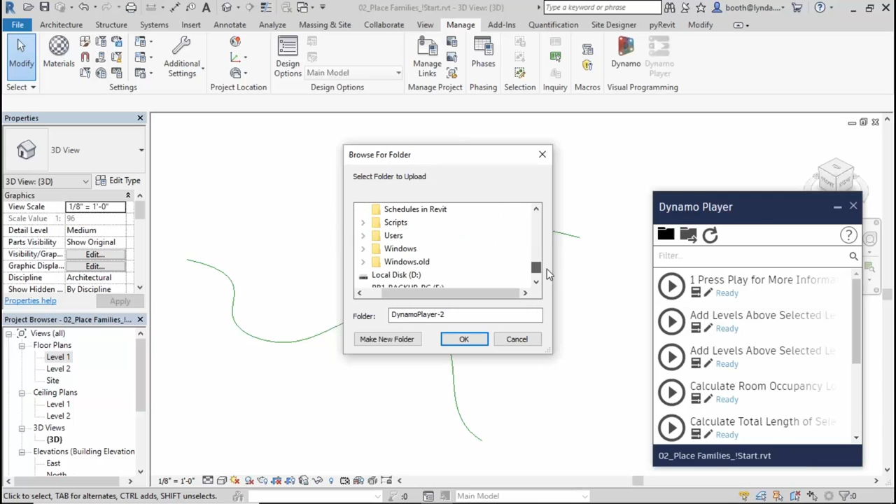Right next to that, there's another button here where you can actually browse to a different folder. So what I've done is prepared some files and put them on my D drive. So if I can just find my D drive here, and then this Dynamo folder, and that'll load a different collection of scripts. And then you can run one of these scripts by simply clicking the play button.

So what I'm going to do is these two lines that are here, I want to place families along those lines. Okay, so I'm going to try running this. I'm not sure if it remembers the selection, so it'll either work or it will generate an error saying it doesn't have a selection. We'll find out together here. So let's run it. And if it does generate the error, I'll just show you the next part of... there you go. It did remember the selection. Okay, so that's perfect. So you can see what it did. It created a bunch of trees along those paths.

Now, this one would have been fairly easy to do yourself directly in Revit because it's along a linear path, and we could have just simply done an array. This one is a little more challenging because it goes along a spline path, and there really isn't any way to do that in the standard Revit user interface other than to just manually place each one of those trees. Now, I'm using trees here, they could have been people, they could have been furniture. It doesn't really matter what you're putting along that path, but because I'm following an irregular path, it's a little bit more challenging to do that, so that's a place where Dynamo can help.

Now, what I was starting to say was if it didn't remember the selection, there are two little icons right here on Dynamo Player. There's this one and this one. This one allows you to edit the graph in Dynamo. We're going to build the graph actually from scratch, so we're not going to do that one. But this one says Edit Inputs, and what that does is it shows you any of the inputs that you can interact with in this particular graph, and the one that I was alluding to was this one here, the selection. So it remembered these two elements, which is this curved line here and this straight line here, and that's why the graph worked without an error.

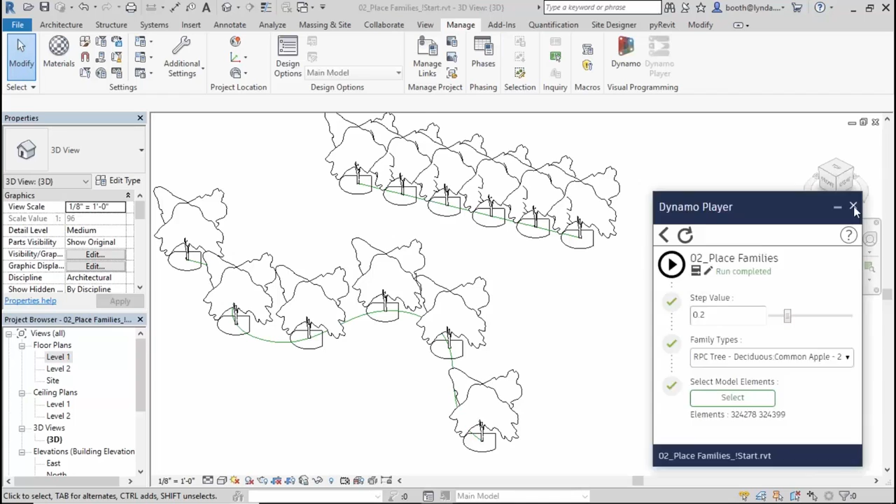But had it forgotten what those two selections were, then it would have generated some sort of warning, and we would have just simply gone here to these inputs, click select, and then select those two lines, and then run the graph again. It would have worked just fine. Okay, so that's what we're after. That's sort of the final result. Now you can't have both Dynamo Player and Dynamo open at the same time. So I'm going to close Dynamo Player, and all of your Dynamo actions will actually show on your undo stack. So what I'm going to do is just sort of undo the Dynamo script right here, and that's going to reset me back to where I started from.

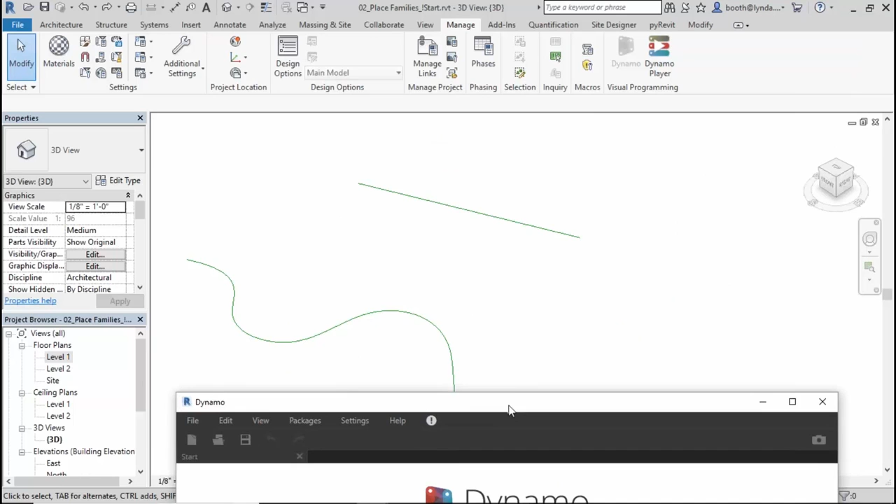And now I'm going to launch Dynamo with the button right next to Dynamo Player. Now Dynamo does run in a separate window, and I've got sort of tight screen real estate here in the webinar, so I'm going to have to kind of move my windows around to show you what's going on back in the background in Revit. But Dynamo tethers itself to the active Revit document. And so this is important when you're using Dynamo for Revit, because you have to start first by opening something in Revit, which we've done, right? I've got this starter file here with the two model lines in it. And then you have to then create or run a script on that file.

So I'm going to click New here, and I'm going to build this script from scratch, the one that we just saw. Okay. Now, the first thing I want to do is sort of a quote-unquote hello world example, but I'm going to do it with geometry as opposed to text. So if you've ever taken a computer programming class anywhere at community college or at a seminar or what have you, there's usually the hello world example where they try and show you how easy it is to program.

And so they write a little bit of code, and then they press a button, and then the words hello world appear on the screen, and everybody goes, ooh, ah. Well, the sort of equivalent of that, graphically speaking, in Dynamo would be to create some quick geometry, right? So what I want to do here is to show you how we can start to use Dynamo to create things, right? So I'm going to create a simple point, okay? I know, very exciting, but let's start with that.

So Dynamo is organized over here in a library, and if I expand these groupings in the library, they often have subgroupings and then sometimes even more subgroupings. And so at first, I recommend that you browse through the library and try and find where things are. And then eventually, you'll notice there's a search field up at the top. You'll be able to search for things because you'll kind of remember that you need this or that node.

So the way that Dynamo works fundamentally is there are nodes, which are little pre-written blocks of code, and then there are wires which connect the nodes together. So you drop a bunch of these nodes on your canvas, and then you just simply wire them together in the order you want the data to flow. And everything flows from left to right. So let's just go ahead and look at a really simple example of that.

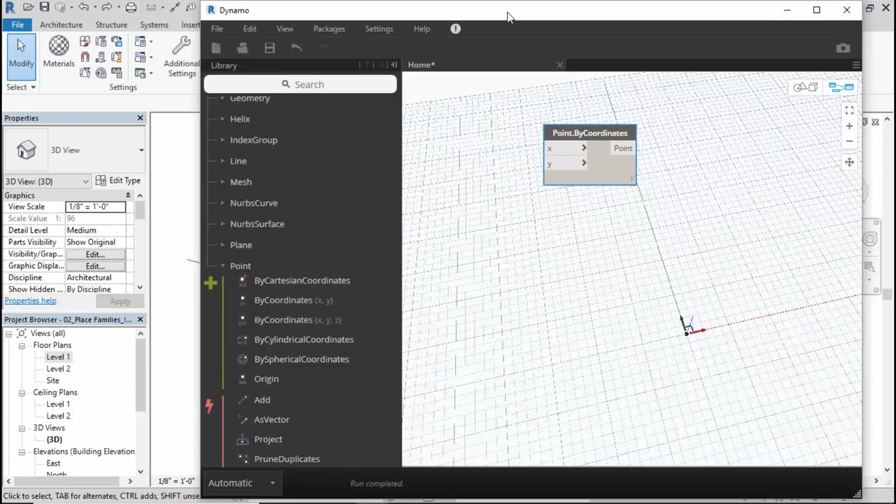Now, if I were to move this out of the way, there's this little blue dot here in Revit. Now, that's not really a real Revit thing. Like if I were to close Dynamo right now and refresh my Revit screen, that blue dot would go away. So there's actually a difference between geometry in Dynamo and geometry in Revit. And we're going to see that as we build this graph, that we're going to take Dynamo geometry and kind of convert it to Revit geometry and vice versa, okay?

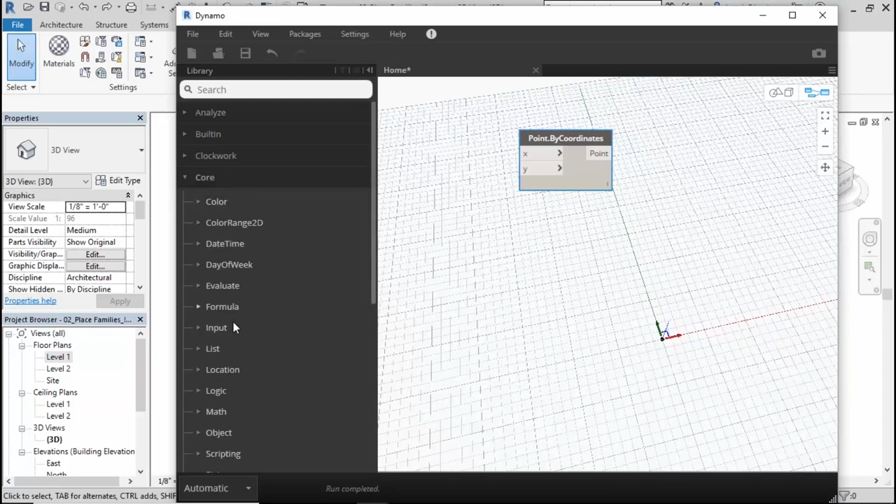So in this case, we've got a point here. Now, if I want to move this point somewhere else, I just need to feed in a different input in either X or Y or both. So I'm going to go up here to the core group, expand that, then expand input, and I'll click the number node twice. Now, I don't really need two of them necessarily, but I'm going to go ahead and put two of them so that I can have a different value for X and Y. But if you want the same value for both X and Y, then you only need one of these. So let's try, I don't know, 5 in the X and maybe 10 in the Y.

And you can just type in any number you want there. And then what you do is you click on the port on the right-hand side. That's an output, right? So here we have inputs, and these are outputs. And you just click there, and that starts creating this wire. And then you just connect that wire to the input of the next node.

And you can see in the canvas that the point has already moved over 5 units. And if I wire this one up to Y, you can see it moves up 10 units. If I reverse these, notice that you can only have one wire to an input at a time. So by connecting that one to the X, it disconnected the one that was already there. But I can kind of crisscross them that way, and it will go the other way.

Now, you can only have one input at a time, but you can have multiple outputs coming out of the same output. So notice that if I wanted 5 in both directions, I only need one number node. So those are a couple different ways that we could create a point and then sort of move it around. Okay, now this is all very basic stuff initially, but just a warm-up exercise to get us started. So that's what I'm calling the geometry equivalent of hello world, right? Create a point and kind of move it around. So very easy to do.

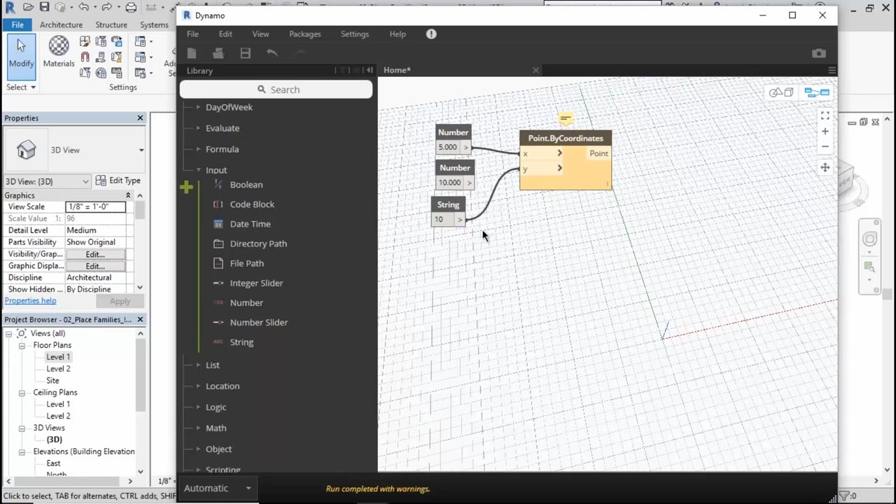Now, even if I took this string and put in a numerical value, it still wouldn't work because this string is formatted as text. You can see the same thing in Excel, right? There are certain functions in Excel that require numbers and others which require text, and so you have to match up the correct values. So again, it shields you from having to write all the code longhand, but you still have to understand the logic, you still have to understand the lingo, so the difference between a number and a string and things like that. We'll see more of that as we go along.

Okay, so what are we trying to do? Well, ultimately we were trying to place families along that path. Well, let's look for a node then that lets us place a family. So I'm going to go down to the bottom here, and there's a Revit branch, and that Revit branch gives me several things I can do in Revit. And what I want to do is create a Revit element.

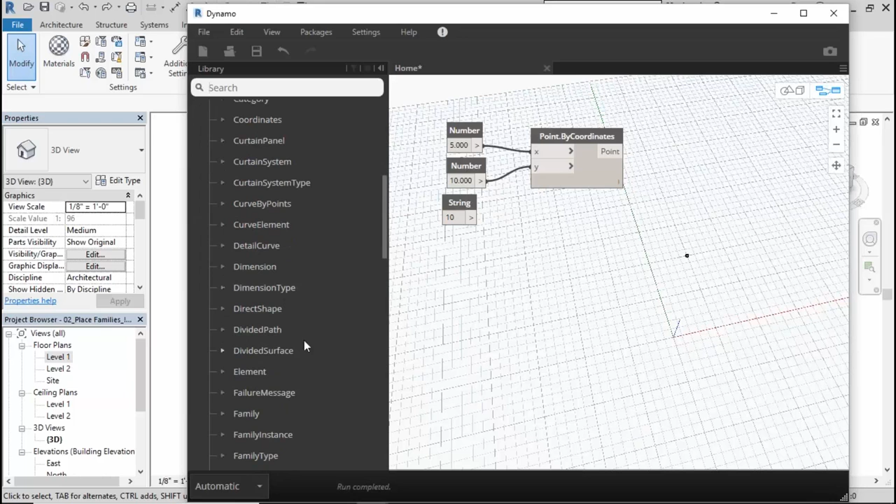So I'll go to this elements branch, and then under element again, this gets a little confusing sometimes, right? Oh, sorry, it's not element again, my fault. See, this is why some people just like to go right to search.

But of course, the trouble with searching is that you have to know what you're searching for, right? So when you're a beginner, you don't know what the names of all the nodes are, so what are you supposed to search for? So I'm going to go ahead and keep doing it through the library here initially, and then I'll switch to search a little bit later.

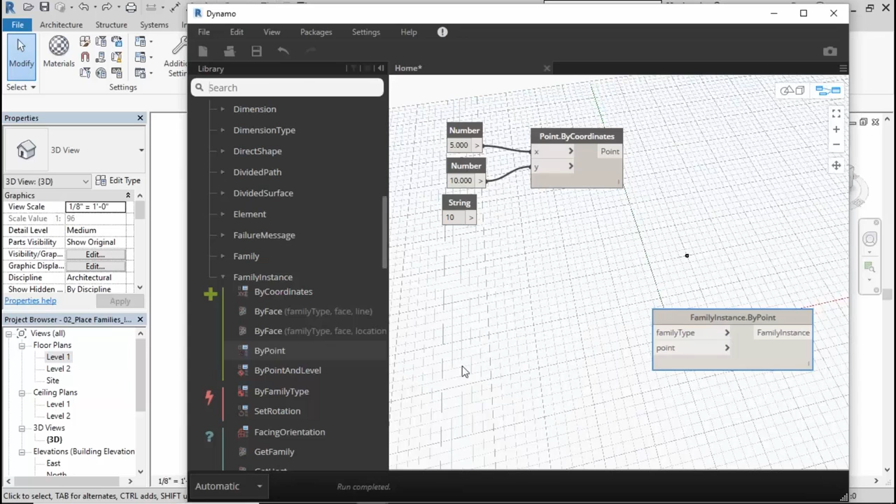So it was under family instance is what I was actually looking for, and then I'll do by point. Okay, so by point just simply means that I'm going to create an instance of a family at a location. Now this is a good way, especially if you're a beginner, to figure out how to set this up. Like, how do you know where to start? Well, think about what you want to end with. I want to end with a family placed in my model. So what inputs does that require?

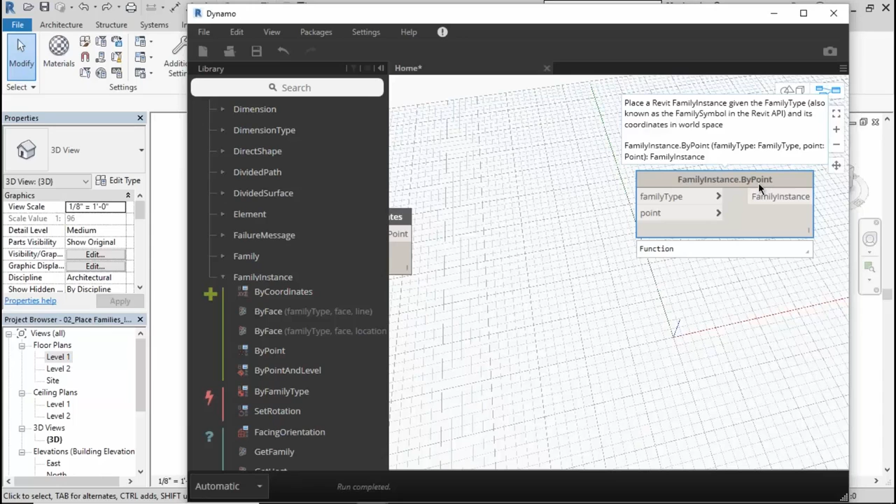So when we look at family instance by point, if you hover over it, it gives you a little message and it's giving you some more information. Not every node does this, but some of them do. So if you read through that, sometimes that's helpful. But there are two inputs. So one is family type. In other words, which family do you want to place? And the other one is point. Well, hey, we happen to have a point right here. So what if I just took that point and fed it in there?

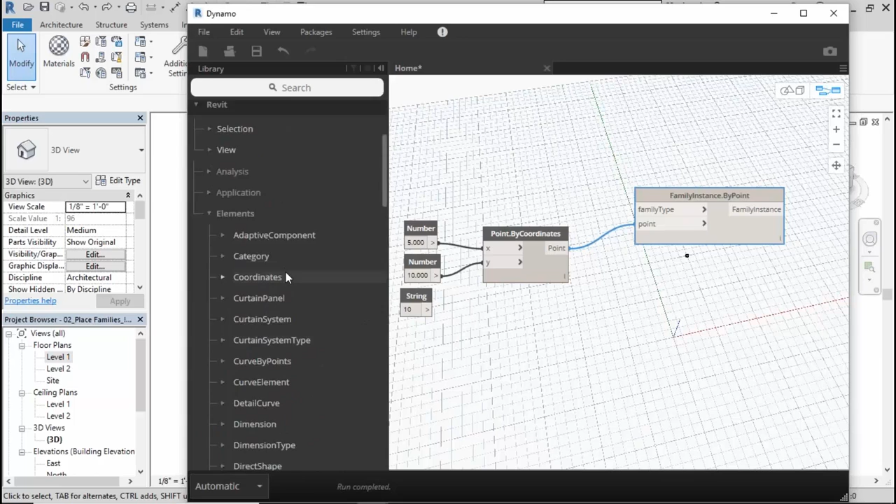Okay. Well, that's great. But now before I'm going to see anything, I still need to feed in that other input. So now I'm going to come up here under selection. So still under Revit, under selection, and then there's an item here called family types. Family types is a drop-down. And if you expand that drop-down list, it will list out all of the families that are in the current Revit document. So if you remember at the beginning I said you have to start with a Revit document open. So Dynamo is just reading that Revit document and giving you a list of all the families that are in there.

Now some of these you could place, it just gives you the full list, right? But some of these wouldn't make sense to try and place. Like you couldn't place a baluster because a baluster is part of a railing. So it would fail if you chose that. So you do have to know what's possible in Revit. Dynamo is not going to create new functionality that doesn't exist in Revit. It's just simply working with Revit.

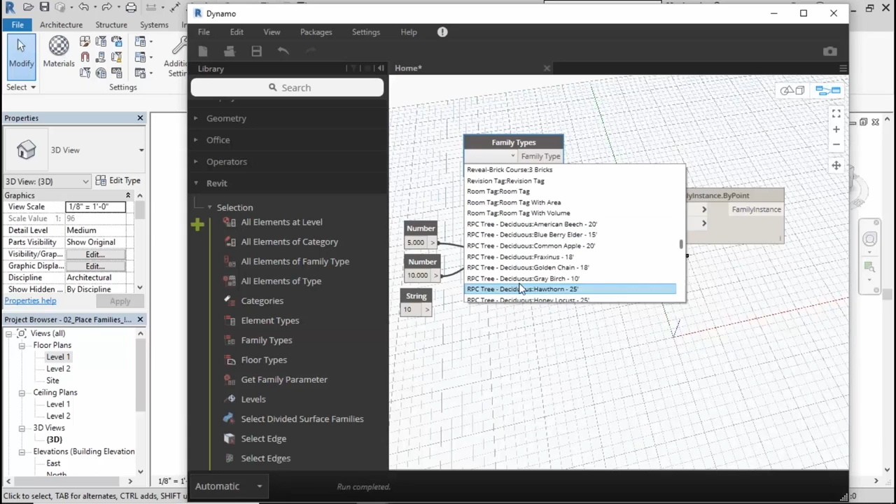So what I'm going to do is scroll down here to the R's and look for my RPC trees. And it doesn't really matter which one I choose here. So I'll choose this golden chain one, right? And then feed that in. And you won't see anything happen here in Dynamo just yet, but if we move this out of the way, notice that we do have a tree, and that tree is at 5, 10 or 10, 5. I forget which way I set it up, but it's at that point that we indicated.

Now, that's not exactly what we were looking for. We said we wanted to put trees along that path, right? But we're getting there. We're working our way up to it. And the point that I'm trying to make here is if you start at the end of your graph and think about what you want to create and then work your way backwards, it's almost like a reverse wizard walking you through the process. Just by looking at the inputs that are required, you can start to figure out what you've got to feed in there, okay?

Now, placing a single tree using Dynamo actually is more work than just doing it in Revit. So if you just needed to place a single tree, then just do it in Revit, okay? Dynamo wouldn't be very useful for you there unless you're going to do something with that tree further down in the graph. But we wanted to place multiple trees, and specifically we wanted to place them along that curved path. That was our goal, right? So let's back up here and think about it. Okay, we need to feed a family type. We've got that. And we need to feed a point.

Well, it turns out that a big part of working in Dynamo is lists. So you can feed one point into this port, or actually you could feed in a list of points. So what we're actually going to do is create a list of points, and specifically it's going to be a list of points that follow that curve that we have back there in Revit.

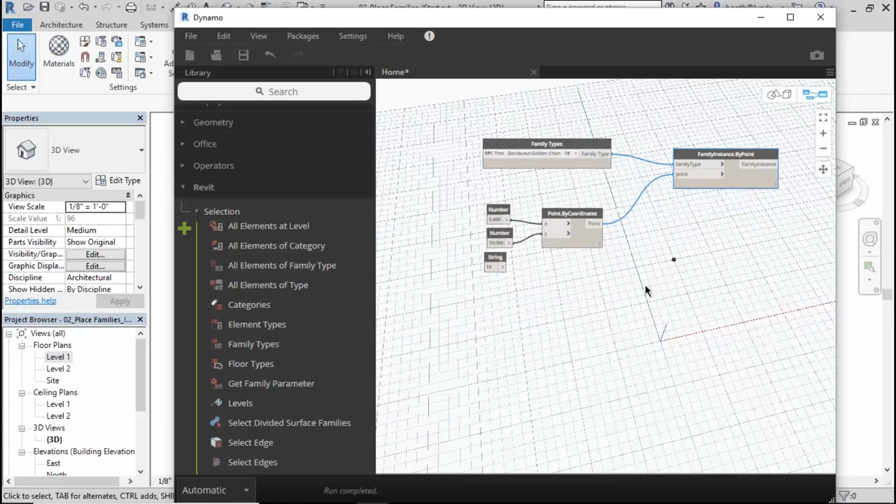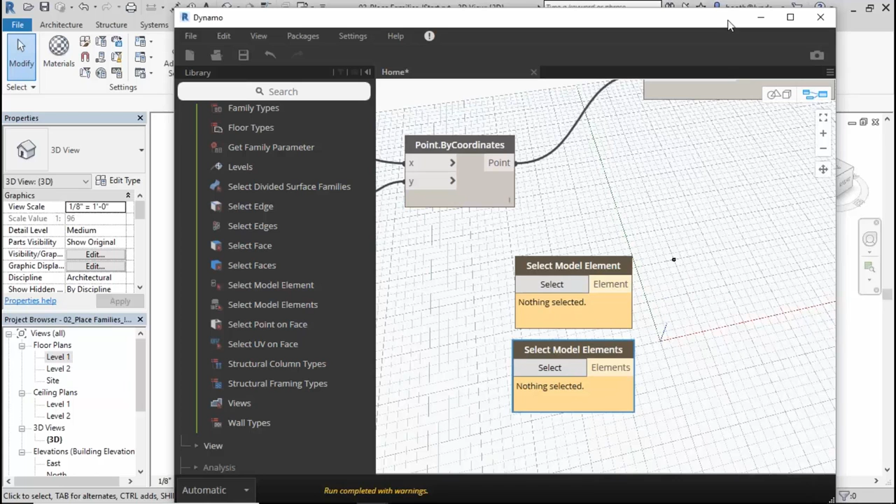Well, right here under Revit selection, there are some really general selection nodes called Select Model Element and Select Model Elements with an S. So you've got singular and plural. Now, if I look at both of these, they both have a button. They function a little differently. So I'm going to move this way over here and out of the way so that we can see Revit in the background, because the way this works is you click this select button, and it will put Revit in a selection mode.

Now, the Select Model Element node wants one thing. So I'm going to click on the spline, and then that node is happy. When it's yellow, it means it's not happy yet. You haven't satisfied the node. It doesn't necessarily mean there's anything wrong. It just means there's some condition that's not satisfied yet. And in this case, there wasn't a selection.

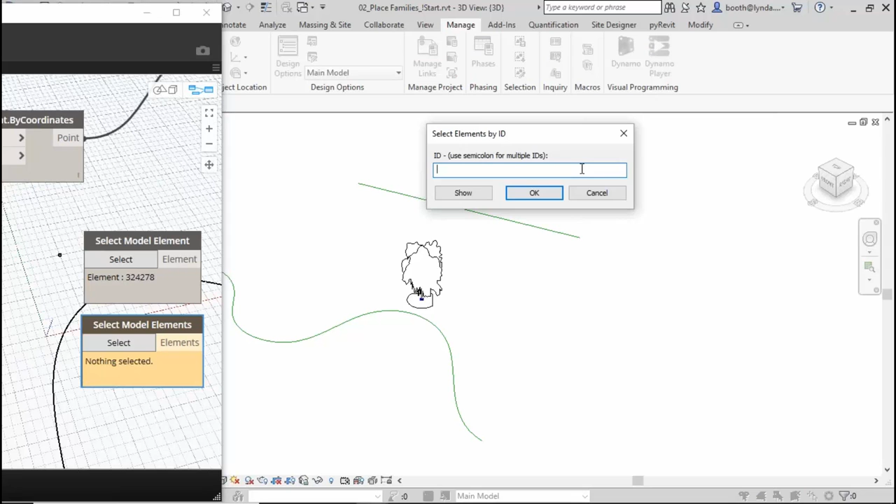The number here, 324278, that's the element ID of that Revit element. So if we go to Manage under Inquiry and we do Select by ID, if you type in that number, 324278, and you click OK, it will actually select that spline. So that number simply represents the unique Revit element ID of that thing. All right, so I'm going to deselect that.

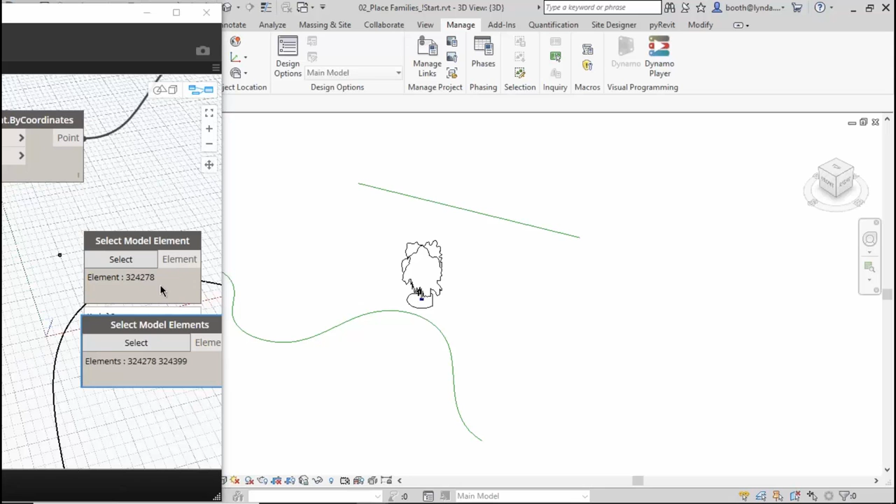Now I'm going to click the Select button on Select Model Elements. This one is a little bit trickier because the only way you can use this selection is either with a window or a crossing. So if you try and click, it won't work. What you do is click and drag, and I'm going to do a crossing selection here and grab both of those model lines. And you'll see I get two element IDs. That's really the only difference between those two selection nodes. If you want to select just one element, use this one. If you want to select multiple elements, use this one.

Now, these are both very limited selection nodes. A little bit later, I'm going to show you a different way to select that's a little more surgical, where you can actually reach into the model and select all the elements of a certain kind or certain family. That's more efficient than having to manually go in and pick them. But in some cases, manually picking them is all you need to do.

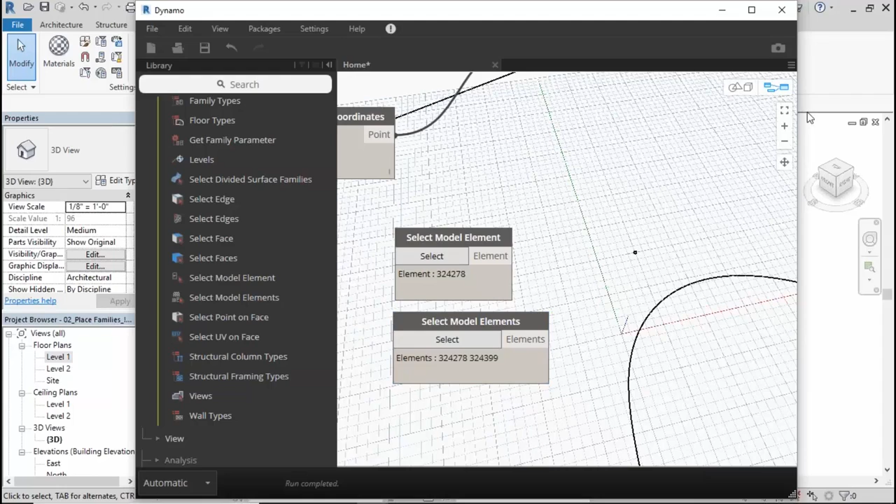Now, let me just adjust the 3D view here, and notice what happened. Even though we selected Revit geometry, Dynamo converted that Revit geometry into Dynamo geometry. So we've got these Dynamo paths now that represent those Revit elements. All right, so far so good.

We've got our two selection nodes. I'll move those over here. And the family instance by point, I'm going to push that over here. And I'm going to disconnect this point for right now, because we're not going to need that for the time being. We're going to create points a different way. So I need to put some stuff in the middle here.

The next thing I want to look at is, even though we selected these two elements, they still need to be turned into something the Dynamo graph can work with. So again, there's a difference between Revit geometry and Dynamo geometry. Sometimes you need what I'm going to call a bridge node. I don't think that's the official Dynamo term, but that's what I'm going to call it. We're going to bridge between what we currently have and what we're trying to create.

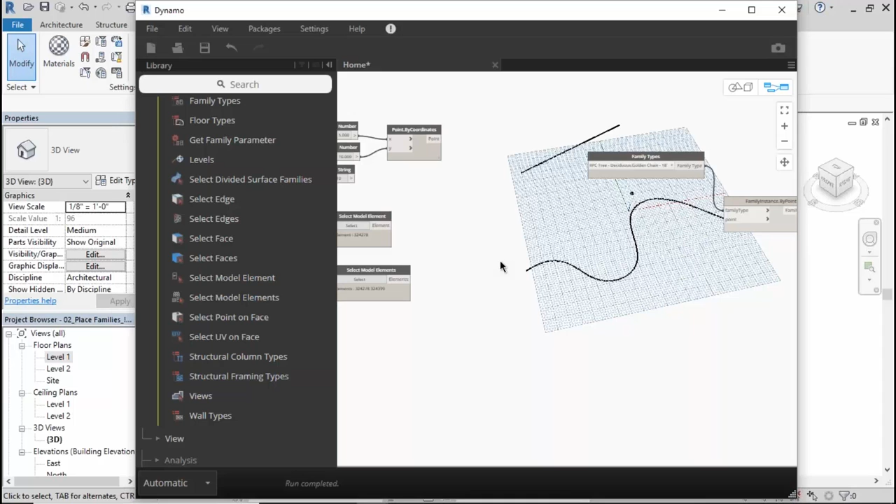So there's a node called Element.Curves. This is going to be the first one I'm going to search for. You could go looking for it in the library, but let me show you how the search works, because I promised you I would. So I'm going to type element dot, and at some point, if I just start typing, it'll start to find it, right?

And so the first item that comes up is the one that I want. Okay, and it says curves right here, so that's the name of this node, and what it does is it pulls the Dynamo curve out of the Revit selection. So right now these are the Revit elements, but we're going to convert those into Dynamo curves.

Now, curve in Dynamo is the mathematical sense of the word curve. So if you think back to high school math class, and I apologize if that's a painful memory for anyone, but a curve is just some linear element with a start point and an end point. And if you find the shortest distance between that start point and that end point, you have a special case of the curve called a line.

But a line is really just that. It's a special case of a linear curve. So we can have curves that are curvy, like this one here, or that are straight, like this one here. But as far as Dynamo is concerned, they're both curves. Okay, so that's one of the things you just have to know from kind of computer science logic in order for this to make sense.

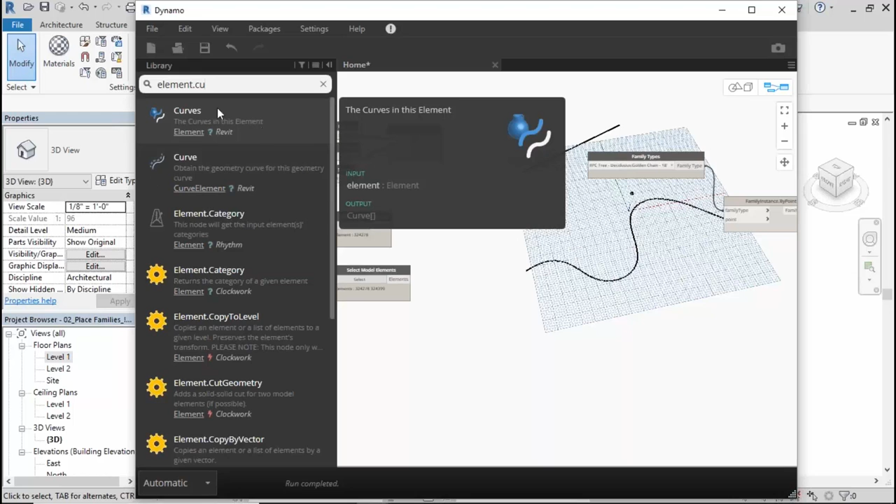Now, if you're trying to find where things are in the library, actually, there's a link right here, and if I click that, it will take me to the branch of the library. So there's Revit, Elements, Element, and then finally Curves. So if you start off searching, but you want to learn the library, that could be a good way to do it, because it'll take you right there. And I use a combination of both. Sometimes I browse for things, sometimes I search for them, just depending on what my needs are at any given time.

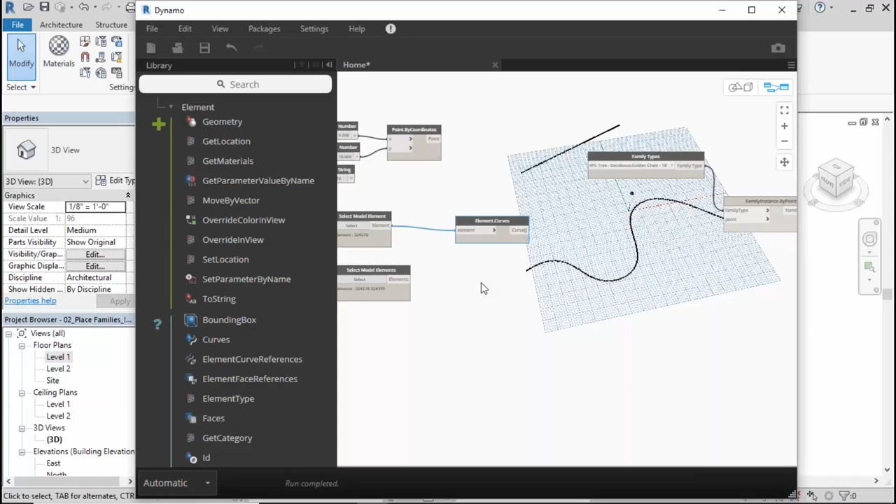So if I take this element here and I feed it into Element.Curves. So again, I'm going to take the single element here and feed it in. Now, just to make this clear, if I select this node, it'll highlight that. And then if I select this, it highlights it again. I don't know if you could tell there's a little bit of interference there. When I select this, there's really two things there. The thing underneath is the Revit element that we selected, and the thing on top of it is the converted curve that we asked Dynamo to create. So there's actually two different items there.

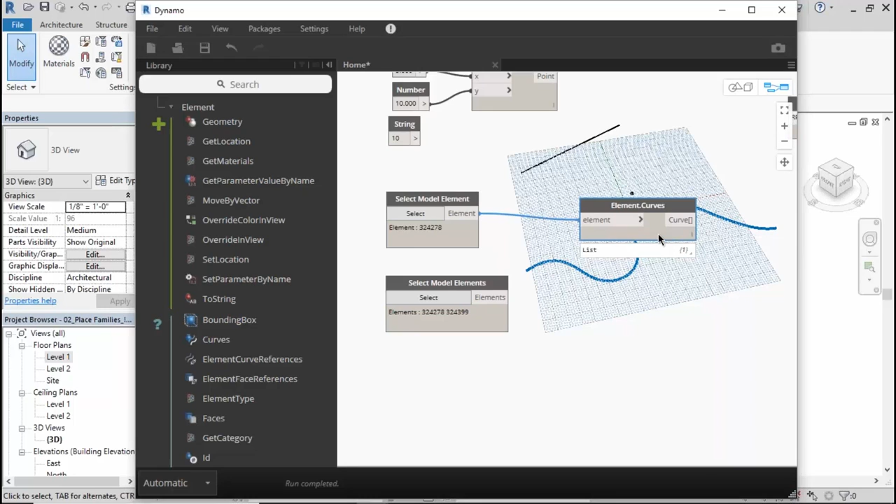It's this curve now that we're going to ask Dynamo to work on, and what we're going to ask Dynamo to do with it is to divide that curve up into a series of segments, or in other words, to find points along that curve at equal spacings. So there's a node for that called curve point at parameter.

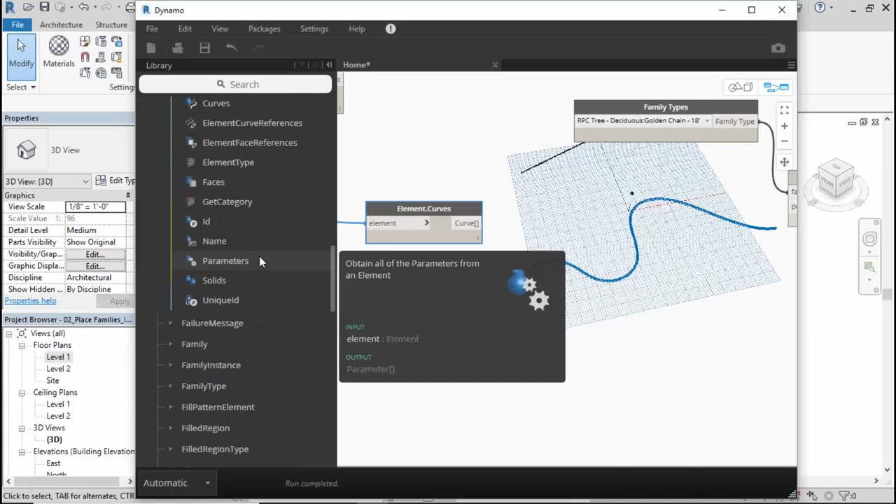Okay, so again, if we go through the library, we could get there from geometry. So where's geometry? Right here. And then we've got curve. And then under here, we've got point at parameter is what I'm looking for. Where is it here? Down here somewhere. Point at parameter right there. Or you could just type curve dot point at, and eventually it would show up in the search. So again, it's really up to you how you go about this.

So there are two inputs here. Curve, which, pretty good bet that those two will match, so I can feed that right in. If you tried to feed in the Revit element, it would fail. So you see how I get a warning here that says those two don't match. So it's really important to match data types. That's why we needed this intermediate node, or what I call the bridge node, to bridge between the Revit element and the Dynamo curve. So when we feed it together that way, everybody's happy, okay?

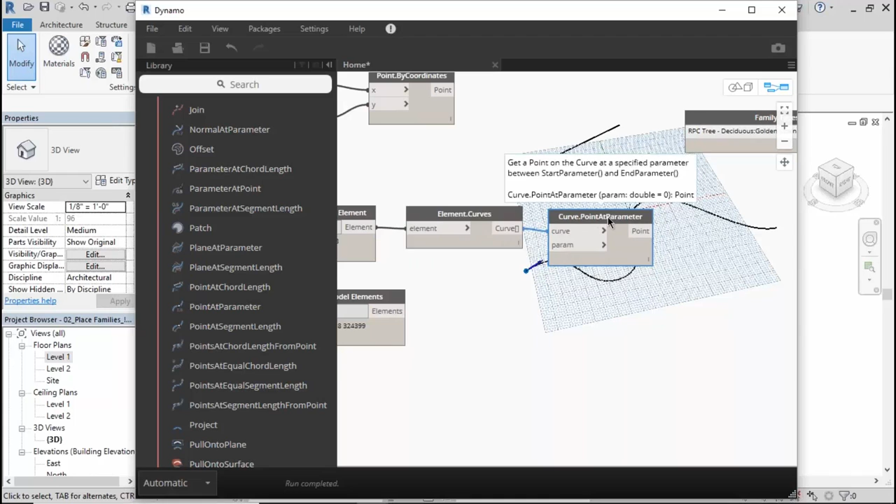So curve. Now, param, what does that mean? Well, parameter at which to evaluate. That's not really very helpful. Double. Okay, well, remember, that's a number, and the default value is 0. Well, what you need to know about anything that says parameter or param is that's a value between 0 and 1. So you can see where we are right now because the default value is 0. It's at this end of the curve here.

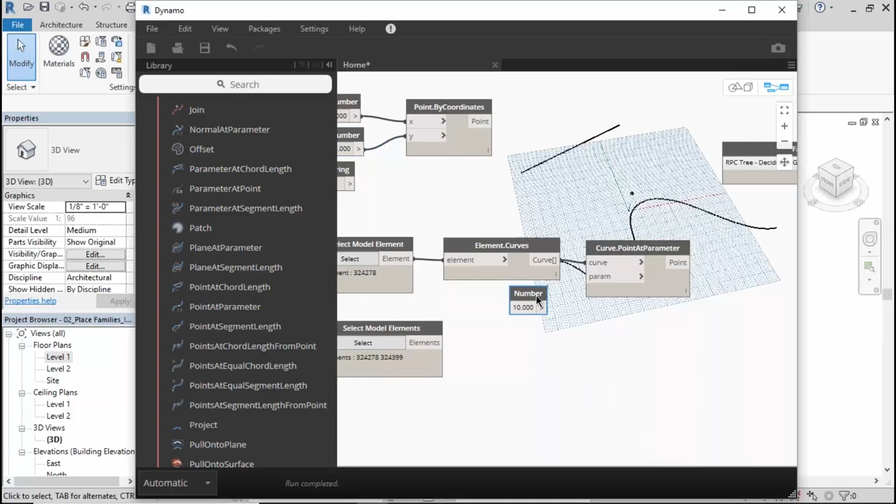I'm going to grab one of these number nodes over here, select it, do Control-C to copy, Control-V to paste, and paste it in right here. Now, I said a valid range is between 0 and 1. If I feed in 10, we're not going to see anything at all. See how there's no point over here? Well, it turns out it's there. It's just way, I can't even find it, but there it is. It's way out there because 10 puts it way off the curve at some tangent point. Not very useful, okay? So, sorry, let's zoom this back up again.

Okay, there we go. That's a little bit better. Okay, so we don't want 10, but let's put in 1. And now we're at this end. What if we put in 0.5? Okay, now we're at the middle, 0.25.

So now you're starting to see what the computer programmers call the domain of this parameter. And the domain just simply means the valid range. Okay, so a valid range for this input is between 0 and 1. So we want to make sure that any values that we feed into that param input fall within that domain. Otherwise, we're going to get something weird happening, like the point way off in hyperspace. Okay, so we want to keep it within that range.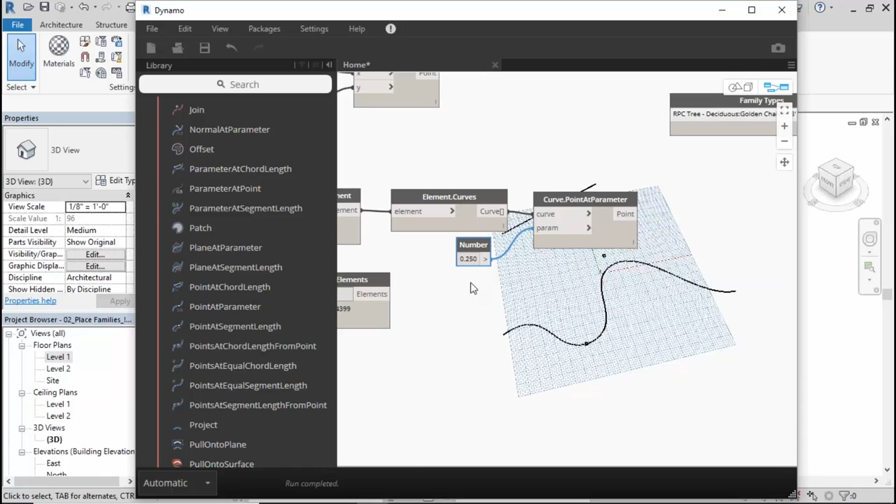All right, so at this point, what's coming out of here is a point. Now, the next thing I want to show you here, sort of a very basic thing, is that you can see output from every one of these nodes, okay? So if you hover over it, these little pop-ups appear and then they go away if you move away. Those are called preview bubbles.

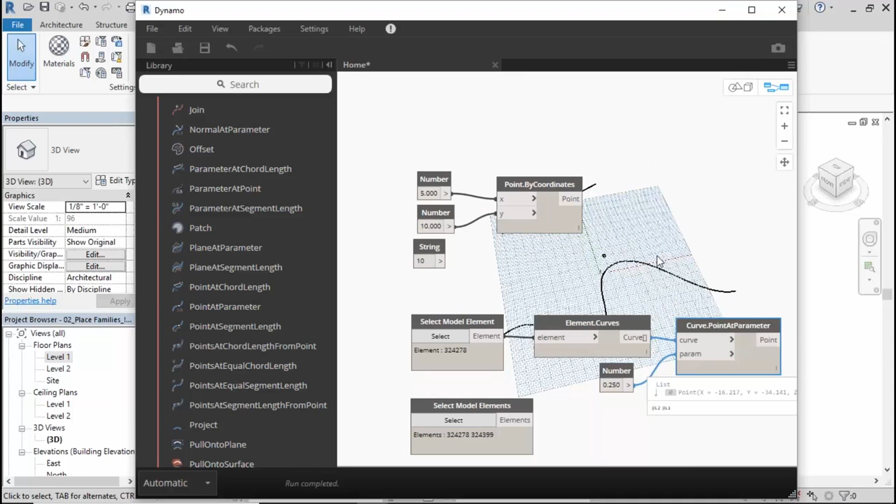Now, if you move your mouse down to the preview bubble, there's a push pin and you can click that push pin to keep that preview bubble open. And what you see here is that the output of this node is actually a point, which is exactly the same thing as what we created over here. See how output here is point, output here is point, which means that if I came back over here and I feed this one into here, we've already seen, that gives me a tree off the path.

But if I kind of move this so we can see both, and I feed this point in instead, now I get a tree on the path, okay? So we're making progress. We're getting there now. We've got a point. It's on the path. And, of course, if I change this to something else, there's 0.1, here's 0.5. You can see that that's moving the tree around, but keeping it on the path, all right?

So what I want to do is instead of just having one point at parameter, I want to create a bunch of points at parameter. So how do we do that? Well, that's our next major concept in Dynamo. I already alluded to it. I said Dynamo is all about lists. Okay, so lists of information are really important in Dynamo. So lists get generated for all sorts of things.

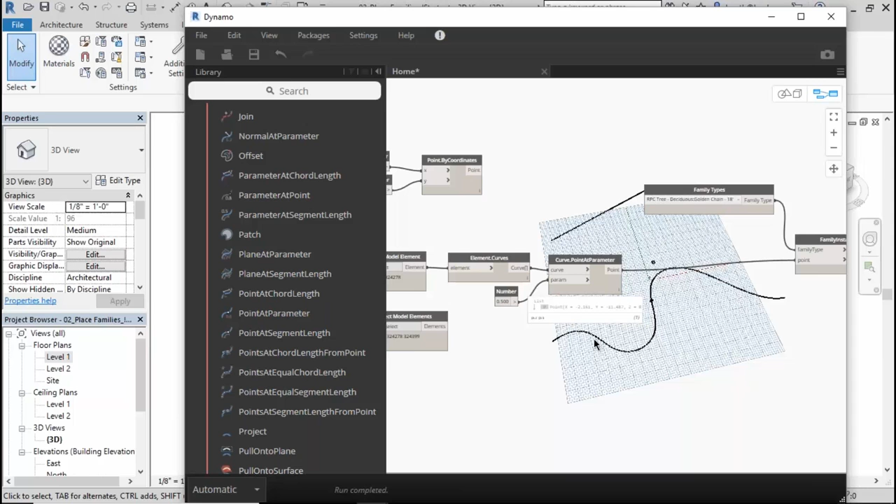So we're going to go up here to the core branch and then look at the list branch. And at the top, there are 3 really basic ways to create a list. You can just create a list with a number of items that you indicate, so you can do a 1 item list, 2 item, 3 item, or you can do a range or a sequence.

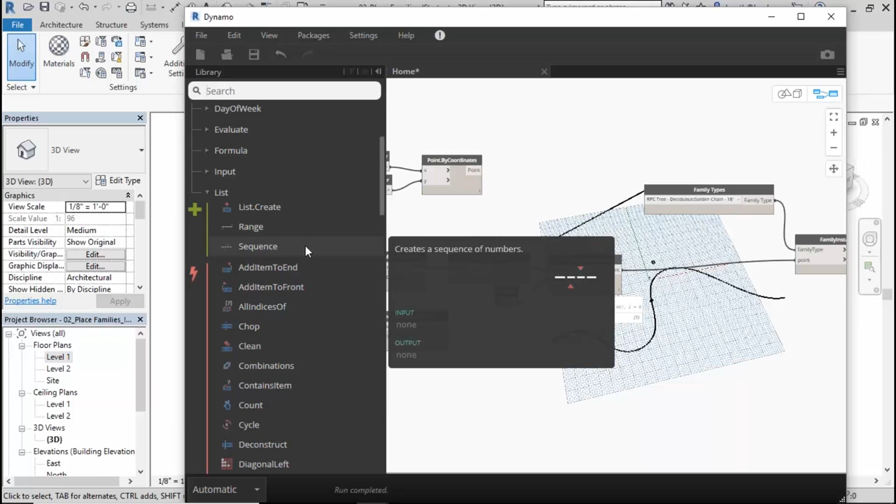So let's do range. Now, when you create a range node, let me just create that all by itself. Notice that if I hover over that, there's already 10 items on this list. You see how it says 10 there in the little curly brackets? So what I'm going to do is hover down here, click the push pin, and look at that list. So the range node has 3 inputs.

The start input is a number whose default value is 0. The end could be a number or a letter. Notice it says number or letter. The end one is defaulting to 9, and then the step is how much space we want between each number. That's defaulting to 1. Okay, so let me just quickly show you how this works.

Let me grab one of these number nodes here, copy and paste it again, and let's say that we just feed this into the start node. Well, notice the change that it had in the list there. Now we started at 0.5. We're still stepping by 1, so it goes 1.5, 2.5, 3.5 until it gets to 9 items, right? Because we're ending at the 9th item.

Now the other thing you're going to notice here is it actually goes 0 through 8. It doesn't go 1 through 9. So another computer science thing, another programmer thing, is that programmers start at 0. So you're just going to have to get used to that, okay? So the first item on a list is always item 0, which means that your count is always off by 1 if you're thinking in a 1-based list versus a 0-based list.

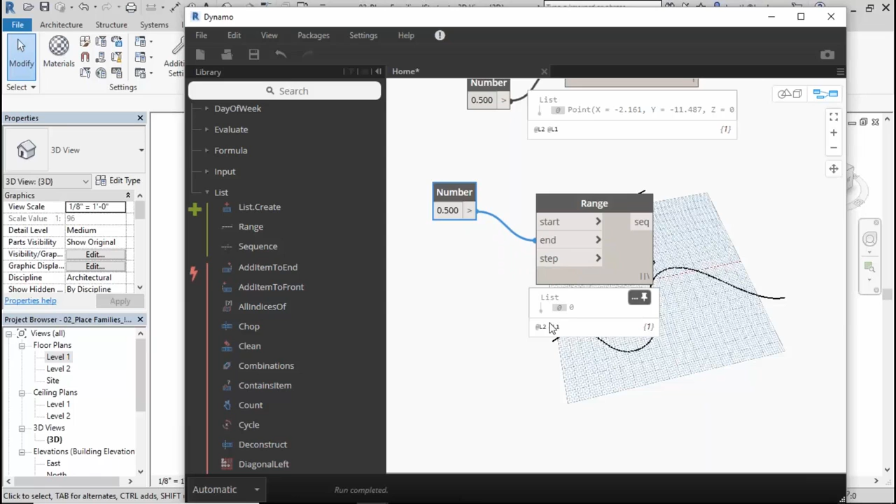Okay, what if I change this to right there? Okay, well now I asked to start at 0, to end at 0.5, but to step by 1, which means that I only get one item on the list, because if you put in item 0 and then you add 1 to it, you're already beyond the end of the range, right? So it can't give you anything there.

What if I change this to 5? Okay, well now I get a 5-item list. What if I put that in the step instead? Well, now I'm starting at 0, I'm ending at 9, the default, but I'm stepping by 5, so I'm only getting 2, right? Or now I'm getting 2, 4, 8, you know, up to 8. So if you vary each of the inputs, you're going to get a very different list each time, okay? So the point is, you just have to decide what you want to input into each of those 3 inputs in order to generate the list that you're after.

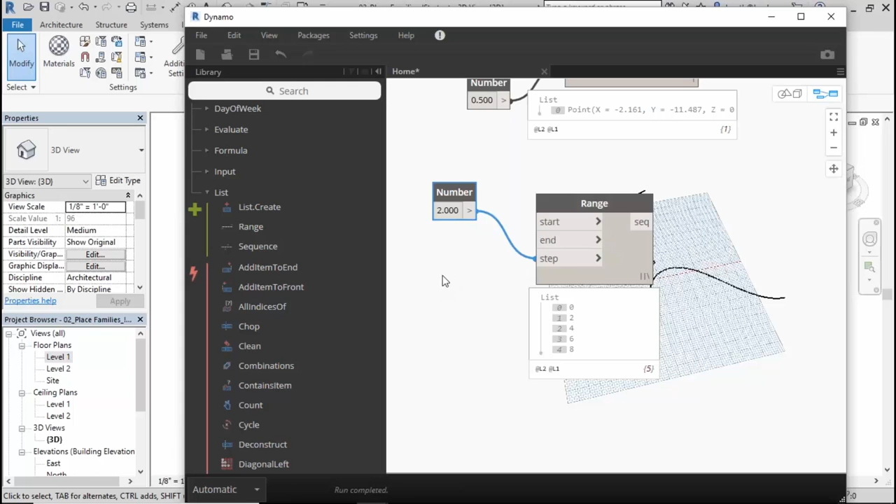Okay, so I'm going to introduce you to another node to make this a little bit more interactive, and that is a number slider. Now, we're going to feed this list ultimately into the param value, replacing this static number node here, okay? So let me just move this out of the way a little bit, and we're going to make room for the list in here.

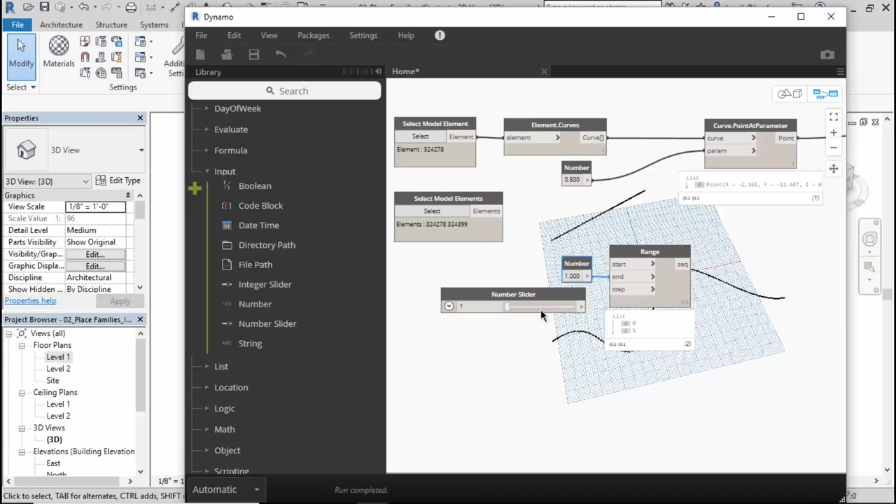So remember what we said the range was. We need to start at 0. We need to end at 1. Well, our default value for start is already 0, so nothing to do there. Our end value is currently defaulting to 9, so we're going to feed in a number node there and change that to 1. That's the end value we want. So now we know that our first value will be 0, our last value can't be more than 1. So now the step we're going to control with this slider.

Now, if we just feed this in, it's really not going to work too well, because notice that the domain of this slider is very large numbers, which well exceed 1. So we want to change the domain of this slider so that it goes in fractions between 0 and 1. And you do that with this little triangle right here. And you could say the minimum value is 0, the maximum value is 1, and the step is 0.1, for example. Well, now, as you change this slider, here's a 0.1 value, here's 0.2, here's 0.3, 0.4, and eventually you're going to have a very short list because it doesn't work anymore.

So it's going to work best at these smaller values, which means you might want to change this to 0.5, or you might even want to change this to 0.05 so that you get a little bit more range in here. However you do it, I'm going to stop at 0.2 because that gives me a decent quantity. It gives me 6 items and they're spaced 0.2 apart, okay? But as long as you build your slider in such a way that it works within the domain you're after, then you should get nice results.

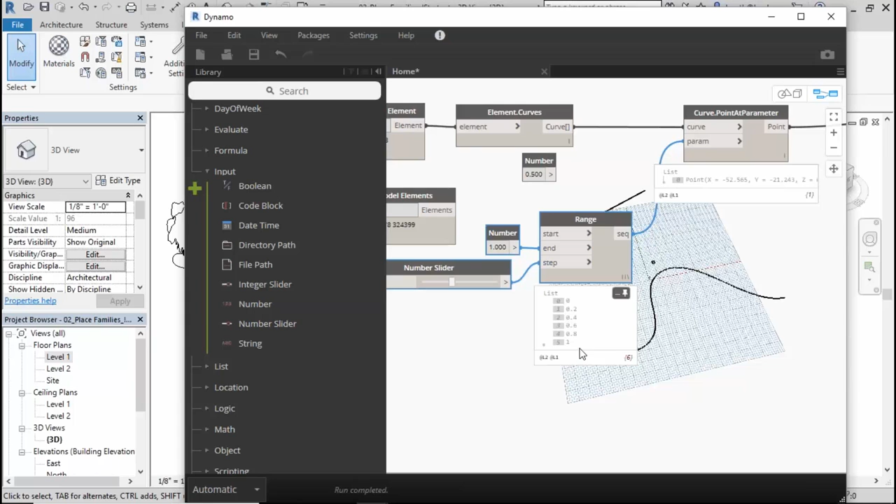So now I've got all of this. Let me just move that right about here, and then take that sequence and feed that into the parameter value, okay? So what does that do for me? Well, at the moment, it doesn't look like it did very much. Notice that I'm still getting only 1 point. So I've got 6 parameters, but for some reason, it's only generating 1 point, and then back here in Revit, it's only generating 1 tree. So what's going on here?

Well, there's another really important concept that we have to understand when working with lists in Dynamo. Lists have a certain way of matching up with one another. So I'm going to show you a couple different variations of this, but we call these ways of matching lists with one another lacing. So there's 3 values. There's shortest, there's longest, and there's something called cross product.

So shortest lacing takes 2 lists, and it just comes up with the smallest number of pairings possible. So if you have a list of 2 items on the one hand and a list of 4 items on the other hand, you're going to get 2 pairings because it's going to take the shorter list and just match up item 1 on that list with item 1 on the next list and item 2 with item 2, and then when it runs out, it just runs out. If you do longest lacing, it'll actually use the longest list and match everything up.

So it'll do 1 to 1, 2 to 2, but then when it runs out, it'll just match the last item on the short list with each of the remaining items on the long list. Okay, so you're actually going to get the last item on the short list used over and over again in order to satisfy the longest lacing. And then with cross product, if you had 2 and 4, you'd end up with 8 total pairings because it's going to match everything to everything else.

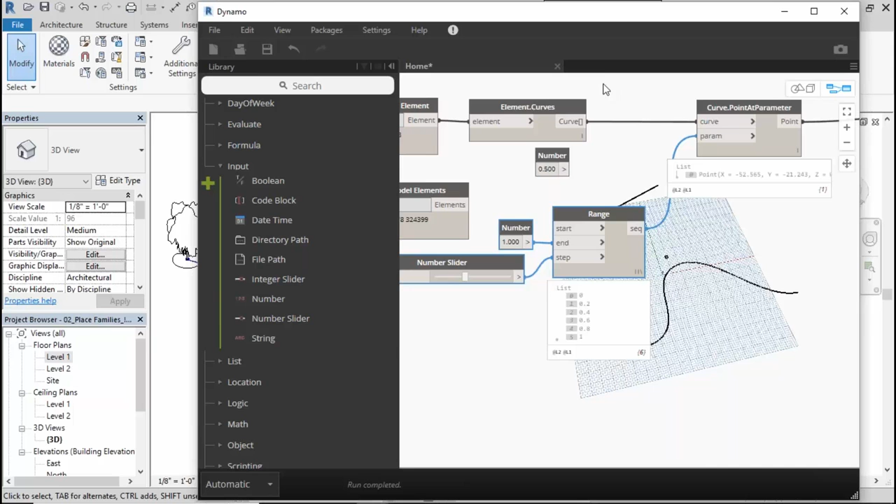Okay, so what we have to do is decide which lacing is going to work here in this scenario to give us what we're looking for. Okay, now in order to really help you understand that, I'm going to switch to the selection that includes both lines, because if I just show you with the curved line, it'll look like longest and cross product lacing are doing the same thing, and it might not be completely clear. But I think if we do it with at least 2 objects, it'll be a little bit easier to understand.

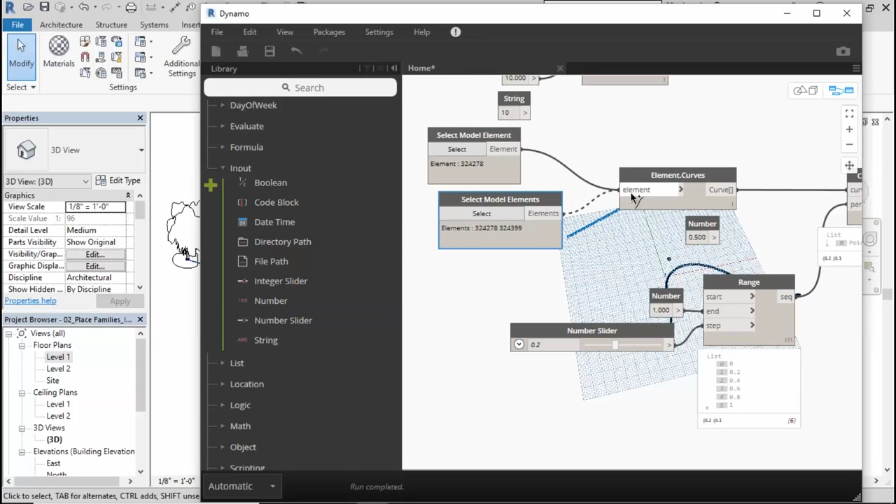So I'm going to take this model element 1 and move it out of the way and replace it with the select model elements 1. Notice that already had an impact on my list here, and that already had an impact back here in Revit. Now, what happened may not be what you expected. What we actually got there was item 0 matched to item 0, and you got the first tree on the first point on the curve.

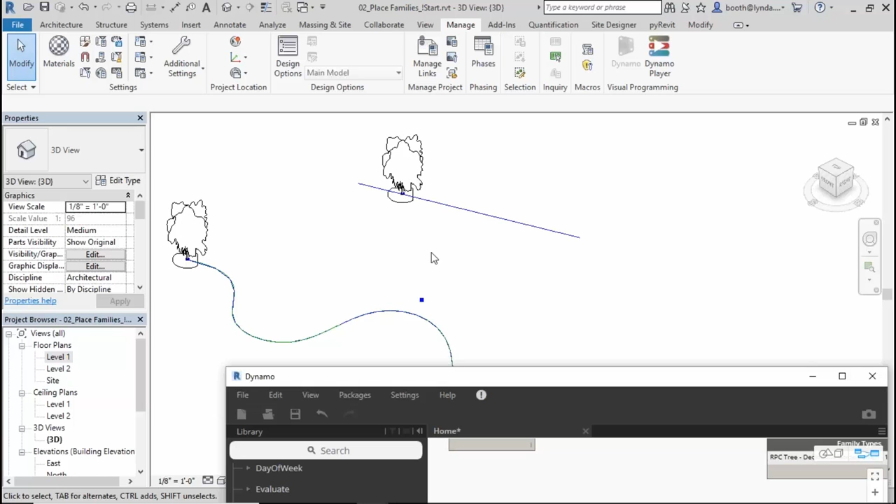And then it went to item 1 and item 1, and it shifted point 2, and it gave us this, and then it stopped. Because shortest lacing says, I've got a 2-item list, right? 2 curves, 1, 2, and then I've got a 6-item list, 6 parameters, and it just says match the first 2 items with the first 2 items and ignore the rest, okay? So what would happen if we took this thing, right-clicked it, and changed the lacing to longest? See how it's shortest by default? I'm going to change it to longest.

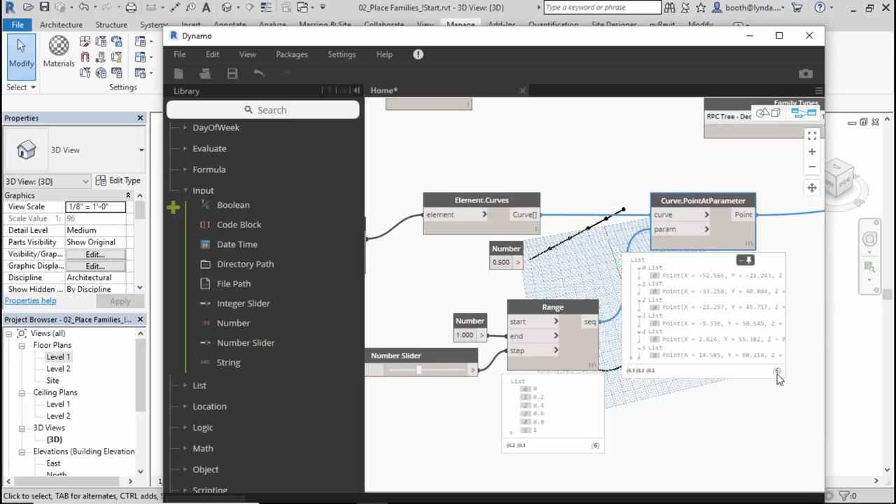Well, now I get a total of 6 points, because what I described longest lacing was, is it item 0 to item 0, item 1 to item 1, then it ran out. So now it's going to take item 1 on the shorter list and match it to items 2, 3, 4, 5, and 6 on the longer list. And what we get is closer, but still not quite what we were expecting, right? We don't have a tree in the first node here, and all the repeated trees are along the straight line. They're not on the curve, right? So what I was looking for was along the curve.

Well, now if I switch to cross product lacing, right-click, lacing, cross product, it will match every item on both lists with every other item on all the other lists, and you get something like this. Okay. Now, I started to say that if we had kept the original selection back here, a 1-item list instead of a 2-item list, then cross product would have worked, or longest lacing would have worked.

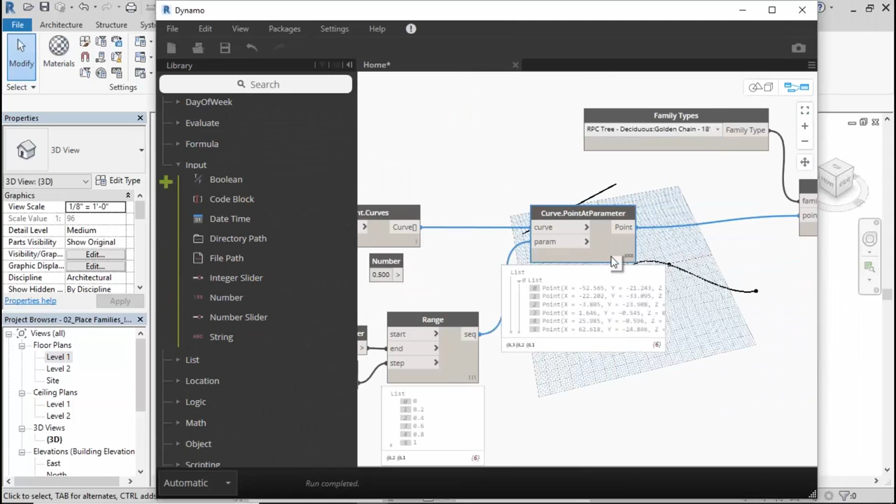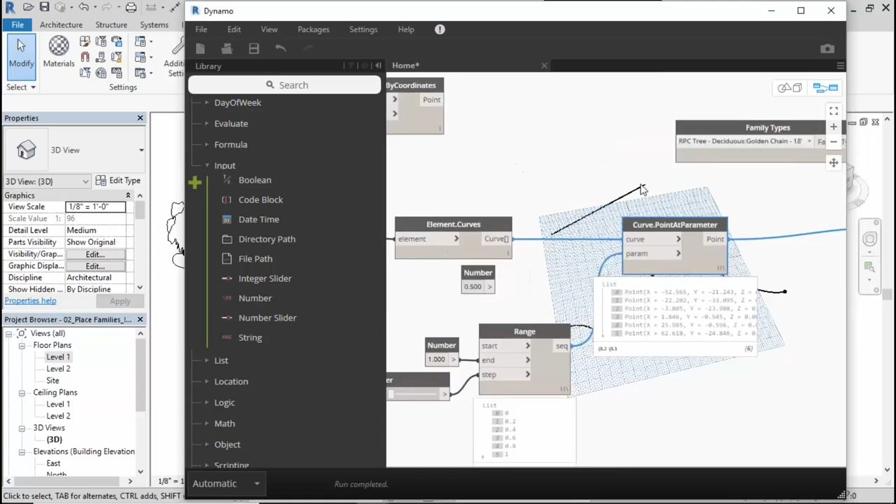Okay, so longest. And that's simply because you match item 1 to item 1, and then you match item 1 again, which is the last item on the list, to every one that remains. And so in this case, with a 1-item list, longest lacing and cross product would really give you the same thing. But I think to fully understand lacing, you need to have a list with at least 2 items for it to make a little more sense. And that's why I switched to this select model elements to kind of illustrate that. Okay, so again, longest lacing looks like this now. So you can see, hopefully, how this graph came together.

I can delete the stuff we don't need. Sorry, I'm adding things instead of deleting things. There we go. Can delete the stuff that we don't need. Let me just maximize this up here and just kind of remind you of what we had, right? So we've got 2 elements. We turned those into curves. We fed that into this point parameter. We created a range of values here with the number of points, fed those in.

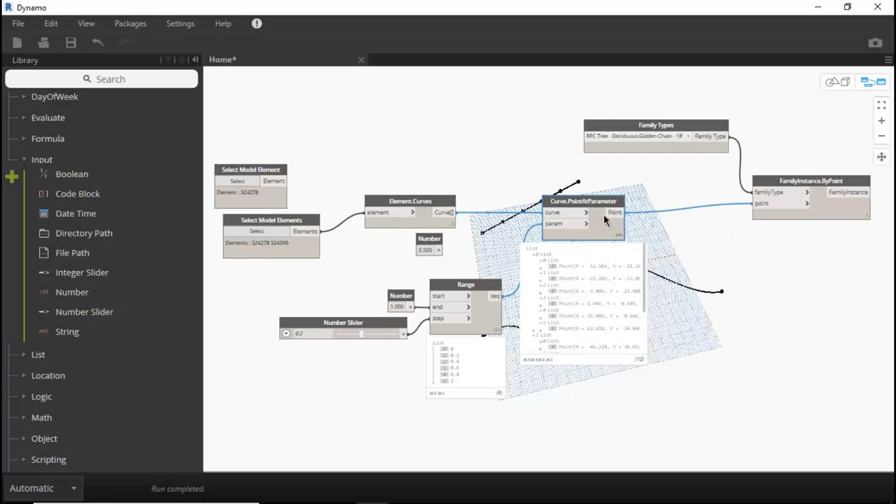And then finally, the lacing is the magic sauce that determines that you're going to get those repeated points along the curve. And finally, we create those families right here, and we get all those families along the curve. Okay, so that's a really simple example. And again, there's a lot of foundational skills in there. So we talked about lists, we talked about lacing, we talked about nodes and wires and how they connect, and data inputs and matching input types, and warning conditions.

There's a lot of depth in that simple, seemingly very simple example. Now, I do have enough time, I think, to show you the other example I wanted to show you, which is something that's maybe a touch more practical, something you might run into every day in your work. And again, it's just to show you a variation of something that we can use Dynamo for. So one of the things that's very powerful about Dynamo is its ability to help us do repetitive tasks, okay?

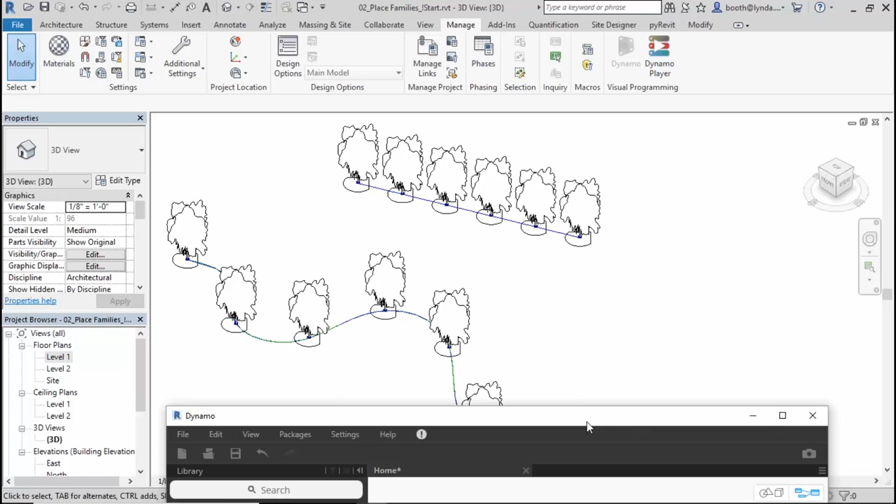So what I'm going to do is close. Usually you want to close in reverse order. So I'm going to close this graph, not save it. I'll keep Dynamo running, and then I'm going to close my Revit file here, and I don't need to save that either. I'm going to actually open the sample project. I'm sure you've all seen this one before, right? The RAC advanced sample project. There it is. So everybody's seen this one before, no doubt. This is the little school building provided with the software here.

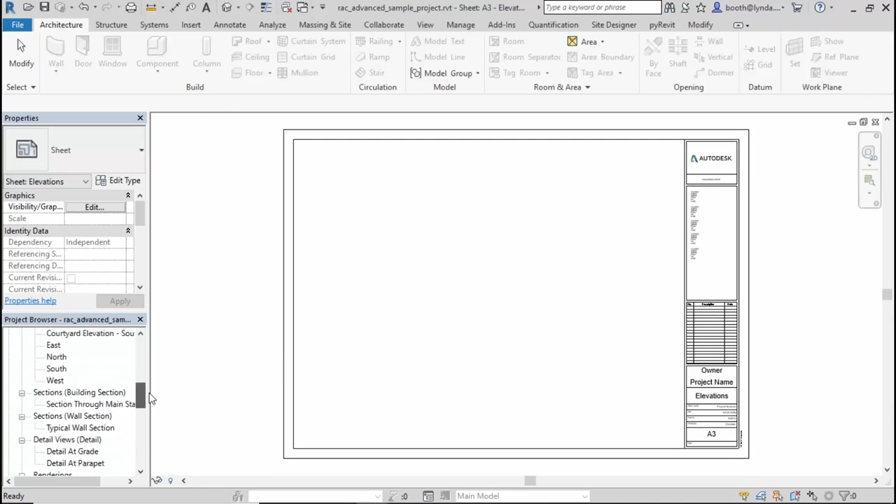Now, it's only got 2 sheets at the moment. Okay, so I'm going to come down here, right-click this, create another sheet, accept that, rename it, because I don't know why it went to A3, so I guess they had an A2 previously, and I'll just call this elevations. And let's minimize Dynamo there, I'm going to throw a couple elevations on here. So maybe I'll do the north and the south and perhaps the west. Okay. So a little sloppy, I'm off the screen there, but I didn't place the east or this courtyard elevation.

So at this point I've got 3 sheets, and the floor plan sheet has just one thing, the section sheet's got a bunch of stuff, the elevation sheet's got a bunch of stuff, and so a lot of times people will have an office standard that says if a view is on a sheet, we want the name to be uppercase, and if it's not on a sheet, we want to keep it lowercase, right? So let's say that was your office standard. Could we use Dynamo as a way to help us with this?

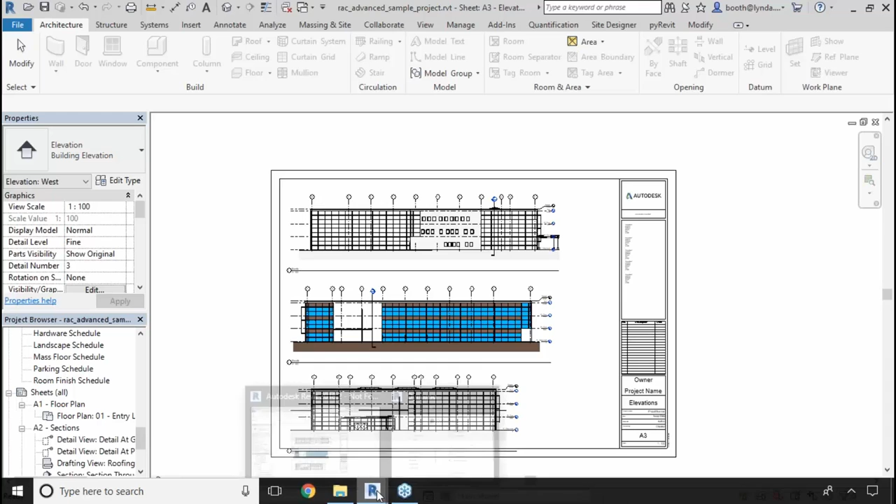So I'm going to go ahead and walk through this graph here. Now, I have it already, and I'm going to open it and just walk you through it as opposed to building it from scratch, because I'm not sure we have the time to build it completely from scratch here. But a very important thing here is the previous graph was running automatically. So that's a really nice way to work in a simple graph, because as you make changes in the graph, it's happening immediately in Revit, and you can see those changes in real time. But sometimes you want to evaluate the graph first, make sure everything's what you think it's going to be, and then run it when you're ready.

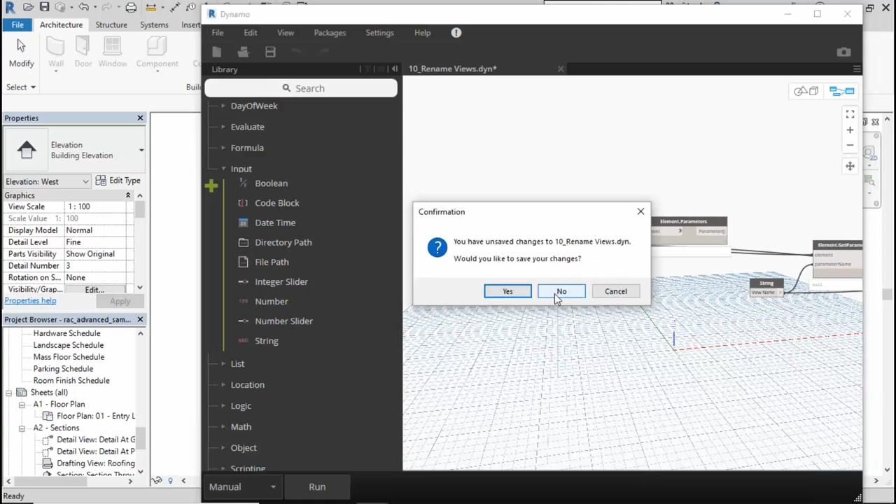So notice when I select an existing graph here, there's an open in manual execution mode checkbox here. So I want to make sure that's checked so that this thing opens but doesn't try to run immediately. I'd rather explain it to you first before we run it. And this may not be, well, it might be the right one. I don't know if this is the completed version. Let me see if I've got another version of this. I might have to go with that one because I don't think I have the completed version. All right, so let's go with that one. It's close, so I'll have to add a few things to it.

Okay, so the first thing I'm doing is, instead of selecting model elements where I have to click on them in the interface, and that would be tricky to do anyway because we're talking about sheets and views, right? So how are you supposed to click those? Instead, I started with a node here called All Elements of Category. So this will look at your Revit model, and it will find all the elements of a certain category. And then here, from the list of categories, I said views, okay? All right, so far so good.

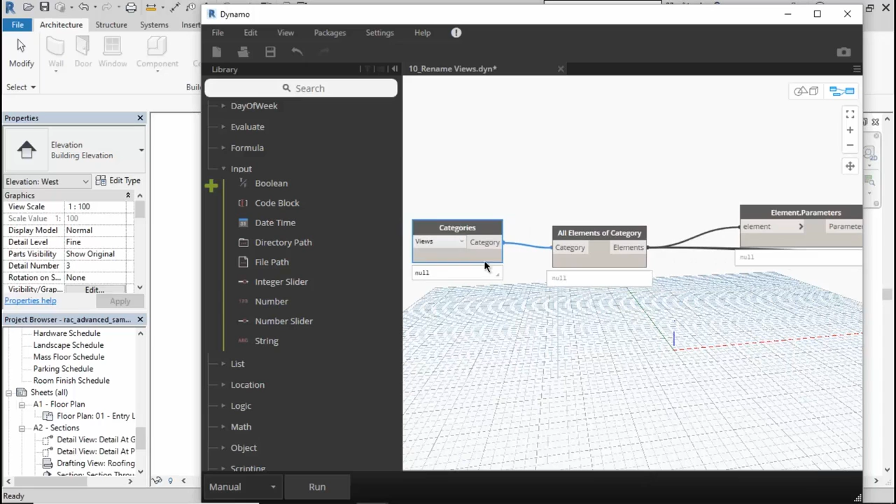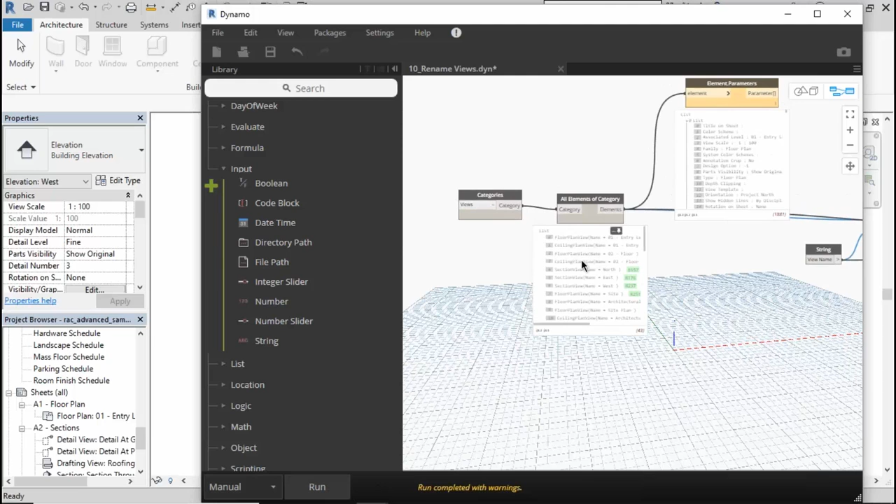Now, there's another cool thing that we can do, and I'm going to move this out of the way here. I'm going to take this one, right-click it, and freeze it. So what that means is I can start right here and just run these 2 nodes without it running the rest of the graph. So let me click Run. Okay, so there's my list of views now that are currently contained in this file, and there's 43 of them, okay?

Now, over here, this one generated a warning with a strange dereferencing pointer. Well, what's happening here is I asked it for the element parameters. In other words, if you want to know all the parameters that are available for a particular element, you can actually use this node, and it will list them all out for you. So they have title on sheet, color scheme, associated level, et cetera.

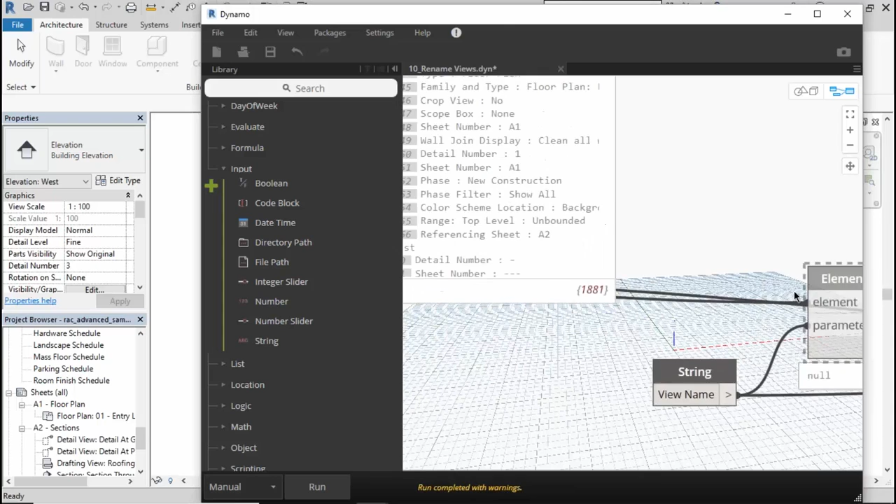And what I was looking for was to find all of the parameters that I could access, because this node right here that I've frozen says get parameter value by name. And this is one of the most powerful things you can do with Dynamo: you can reach into your Revit model and grab the value of a particular parameter. And then you can take that parameter and do something to it if you want to.

So let me unfreeze this, and I'm going to freeze this one instead. Okay, and I'm going to run it again. And this one is asking for the view name. So string value, again, just means text. So the input here for parameter name needs a string. So view name, you've got to type it exactly like it appeared here. So that's why I wanted to get the list of parameters, just to make sure I'm typing it correctly. Otherwise, you do trial and error to figure that out.

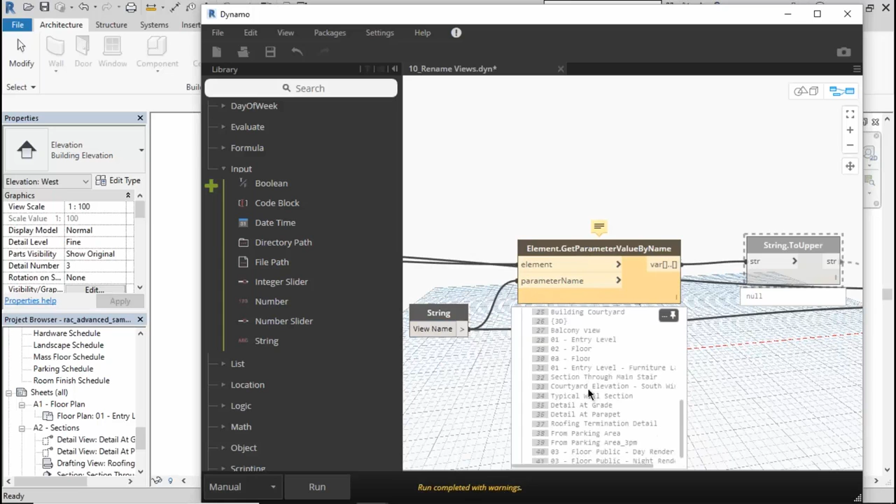But anyway, I feed in the list of views, and then I ask them all what their view names are, and here they are, right? So there's all the view names. Now, actually, what I want to do is copy both of those nodes, paste it, and the other parameter that I want to ask it is what the sheet number is, because the only views that I want to rename are the ones that are assigned to a sheet.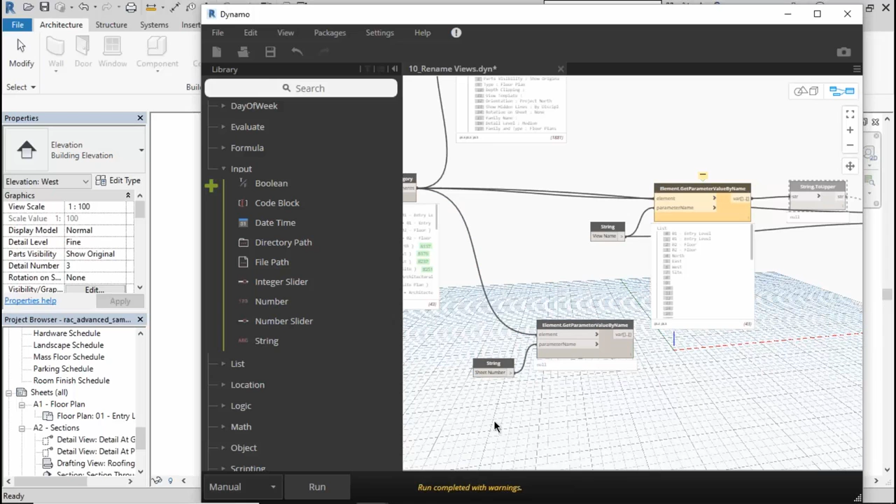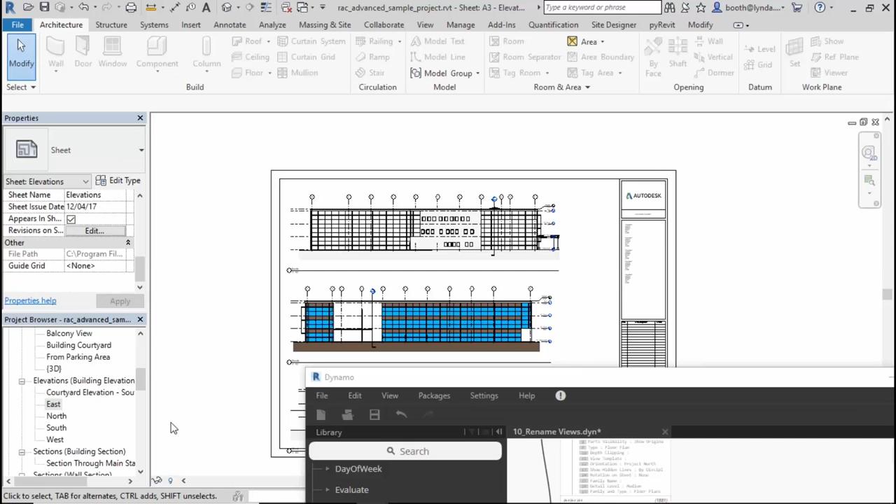Well, if you look at a view back in Revit, you can just do this right in Revit to see. So if I select the west elevation here and I scroll down, it will tell me what sheet number it belongs to, but that's a read-only value. If I select the east one, it'll be empty for that value. The sheet number isn't even listed there. So there is no sheet number for this view. So that's what I'm looking for, is whichever ones come up with a sheet value.

Let's run it, and here it is. So now I'm only seeing A1, A2, A3. Those are the ones that I want. So I can limit my selection now to just the views that actually have that sheet number value assigned to them. So we started with a totally different way to select, instead of trying to select individually. If you're going to select everything manually, you might as well just do it in Revit, right-click and rename it yourself. What we're trying to do is get Dynamo to intelligently select everything for us. So I said, give me all the views, but now I want to say, just limit your work to those views that have a sheet number, because those are the ones I care about.

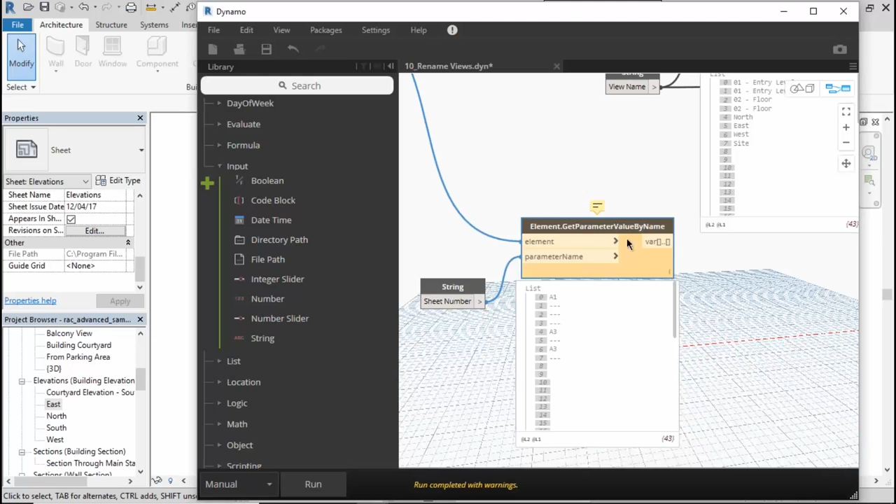So we're going to do something called a bool mask, which sounds kind of funny, but bool is short for Boolean, and a Boolean is two values: true, false, yes, no, up, down, left, right. So what you want to do is get a list. You basically want to look at this whole list of values here and ask them, do they have sheet values or not? And if they say yes, they'll be true, and if they say no, it'll be false, and then we'll just take the true values.

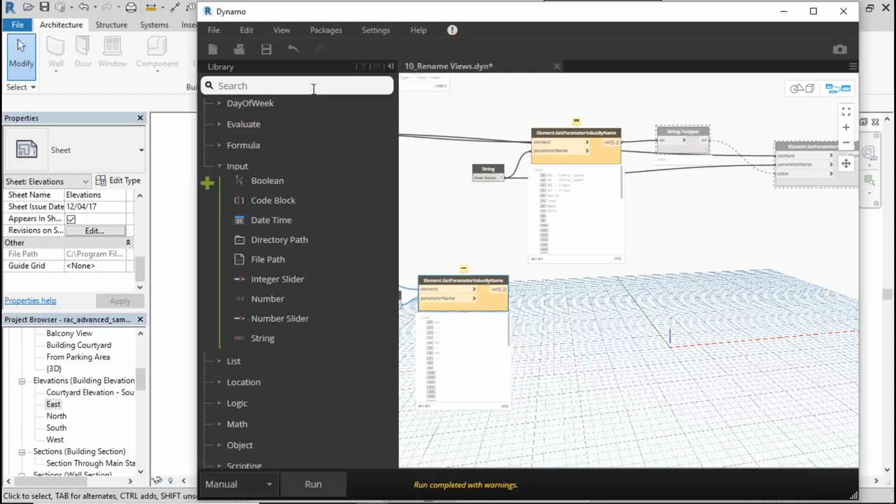So I'm going to do a node here called starts with, and I guess I didn't spell that right. Oh, there's an S right here. Okay, so this is a string value. And if I click on there, you can see it's under core, and then it's under string, and it's starts with, and it's got 3 inputs. So we need a string value, and I'll bring that in, and I want to just put in capital A.

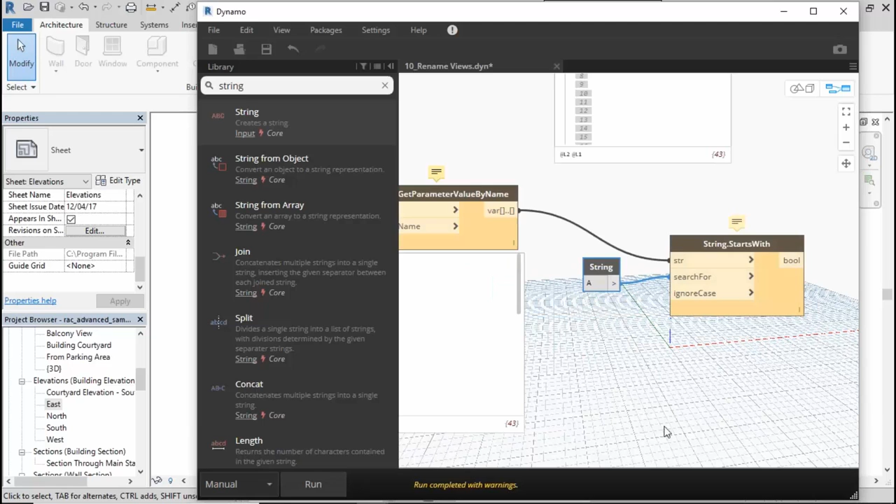So what I'm searching for is capital A, and then I'm going to take all of these values coming out of this list and feed those in, and then ignore case defaults to false, so we're not ignoring the case, which is sort of like a double negative. Anyway, let's run this and see what we get. So here, if I expand that, you see how I get a bunch of trues and falses. Now, it's still kind of in this warning state, and that's because number 18 is a null.

I don't have a lot of time to explain why that is, but the simple answer is not everything on this list is actually a view. Some of these things are view templates, which kind of throws a little monkey wrench into here. So what we want to do is just tell it to ignore the nulls, okay? We don't care about the nulls.

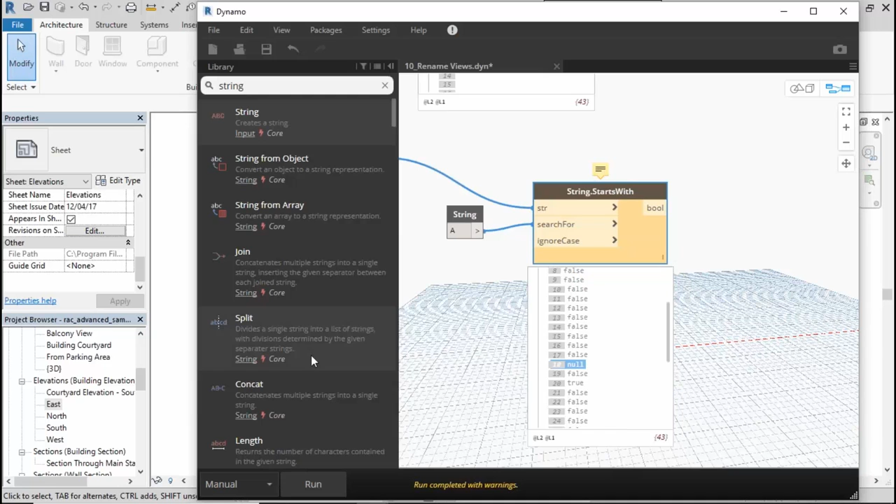All right, so we can actually do that with another node, and let's see. Yeah, well, let's do our bool mask first. I really wish I had the completed version here. Sorry that I'm running short on time now. Let's do bool mask.

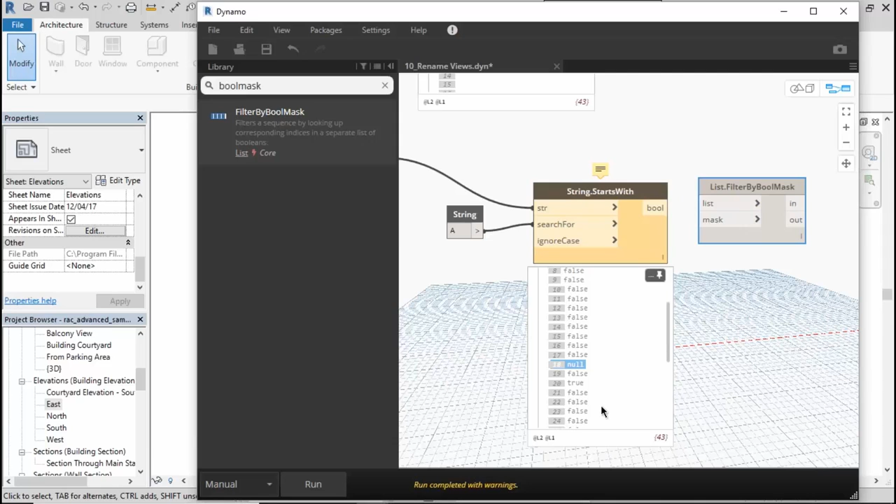Okay, so what does bool mask do? You take a list and you take a mask. The mask is a list of trues and falses. Okay, that's all the mask is. All right, and there's a node here to remove nulls, and I want to just get rid of that. So let's see. Where are you? Let's try remove.

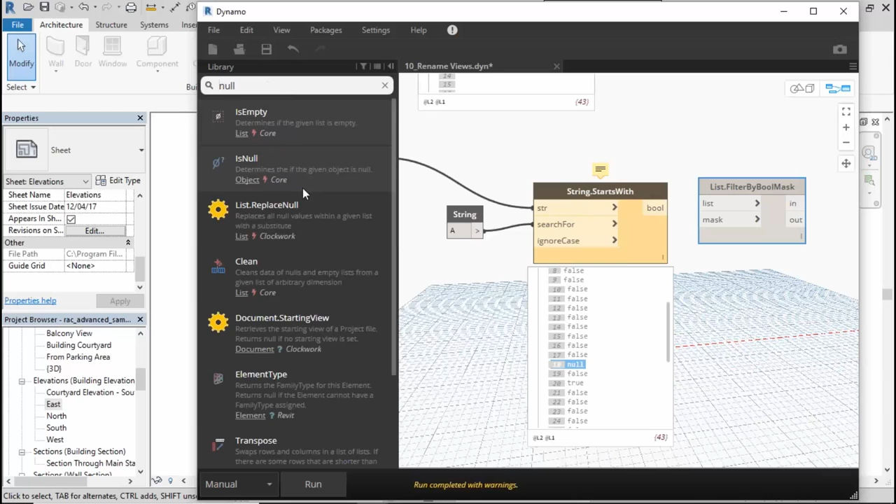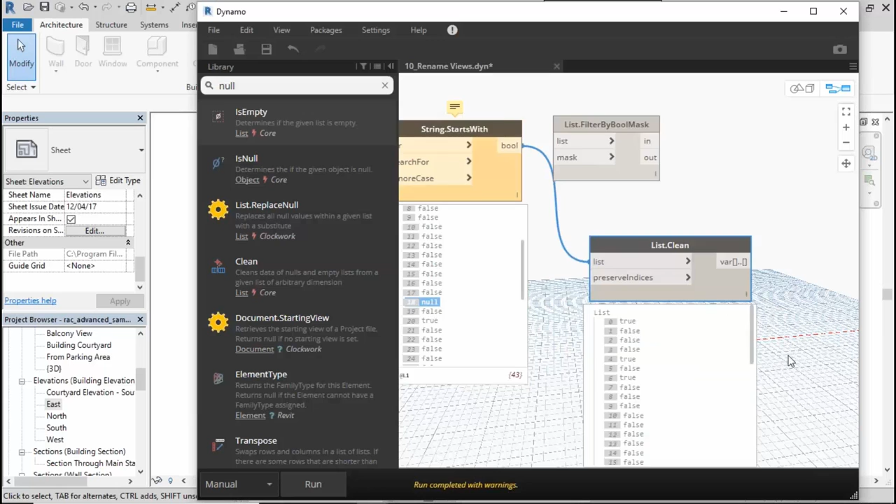Now I can't find the remove nulls. Oh, how about clean? I think clean will do it. Let's see. Let's find out. Let's take this list, feed it in here, and run it. And it still says 43 though. Yeah, that's not the one. Shoot. All right. Well, I'm out of time. Let me try and get this to work.

Okay. So I'm going to take my list here of views, the original list, and then I'm going to take my trues and falses, and then we need something called a watch node. And the only reason I need a watch node is because there's two outputs coming out of here. So if I use the preview bubble, it'll put them all together in one list. And all I care about is the ones that are true. So I'm going to wire that to a watch, and because of the null, it's not working.

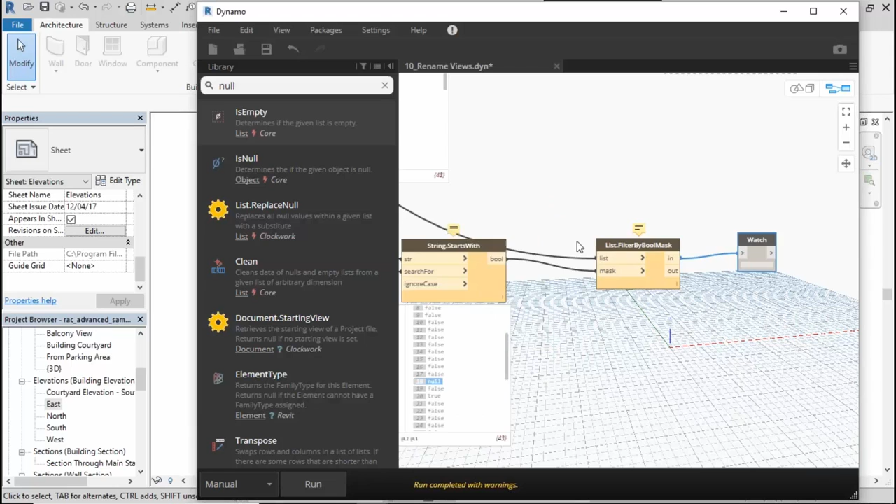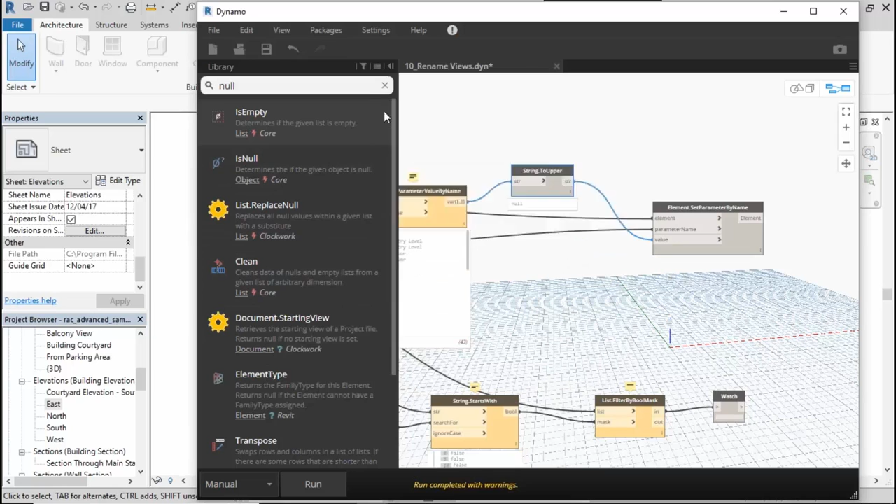All right. Well, let's run the original graph, which is going to rename everything. It's not exactly what I was looking for, but I'm missing the piece here; this is always what happens when you try and improvise live. Let's just run this piece. This is actually a little different graph. This is going to change every single view to uppercase, which isn't exactly what we were looking for. What we were looking for is to just uppercase the ones that were coming out of the sheet. So because I'm having a hard time finding the remove nulls, that's where I'm running into the trouble here. But let's just run this and see what happens.

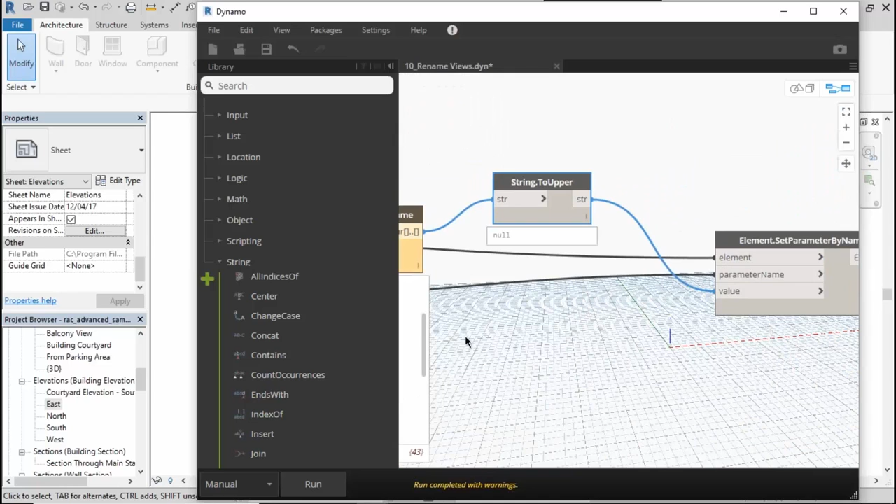Okay, so here's what this is doing. It's taking this list and it's just forcing them all to uppercase. And then we use a set parameter by name. So we go back to the original list of elements. We're using the same parameter name, the view name, and then we're just making them all uppercase. So just watch the project browser over here when I run this.

And of course, I'll get this message in Revit. You've all seen this before. When you rename a view or a level, it wants to rename the corresponding one. I'm going to say no here, okay? And notice that everything just went to uppercase. Now, that wasn't exactly what I was looking for originally. This is a much simpler version of the graph, and this is just arbitrarily making everything uppercase. But it does show you the possibility. So if I get the filtering to work to filter out just the ones that are true that are on sheets, then we can limit that effect to just those.

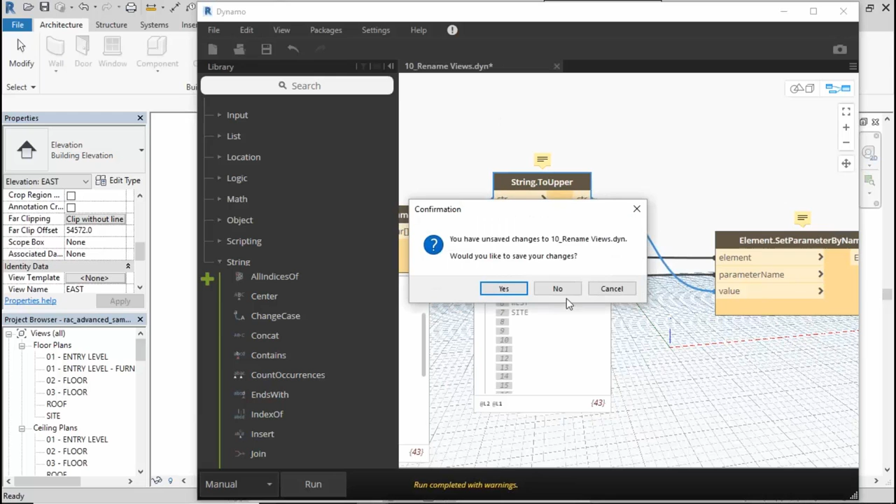Now, the only thing you want to be careful of at this point is this is a live graph running here. So at this point, you would probably want to close it, okay? And I'm going to actually do a save as on this just in case anybody has a question about this before I close it. So let me just put a letter at the end. So then I can close it, okay? Because I don't want it to try and run again while I'm working in Revit. So that's the kind of graph that you'd probably only run when you're ready. And in fact, that's a great one to run in Dynamo Player.

So now that we've kind of started with Dynamo Player, it brings us full circle back around. So if you build one of these, you can hand it off to the team and say, hey, when you want to rename all your views that are either on sheets or not or whatever, assuming you get the other one to work, you can just run this in Dynamo Player and they don't even have to open Dynamo to do it.